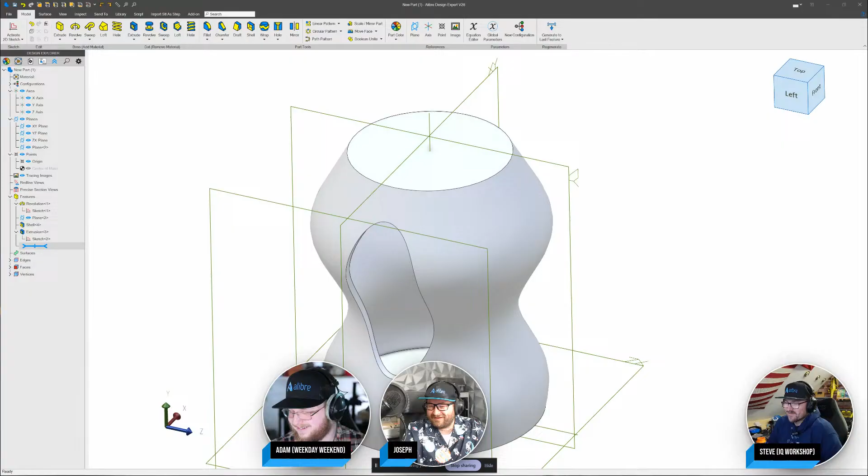So we had this question of, I've got this kind of curvy vase looking thing, and I'm doing a cut through it, and I expect the cut to be flat because if you were to hold this up to a belt sander or something, you get a big flat spot. How do we make something flat like that? Loved the question and thought about how I could make something like that actually be flat, so I'd like to work that out on air.

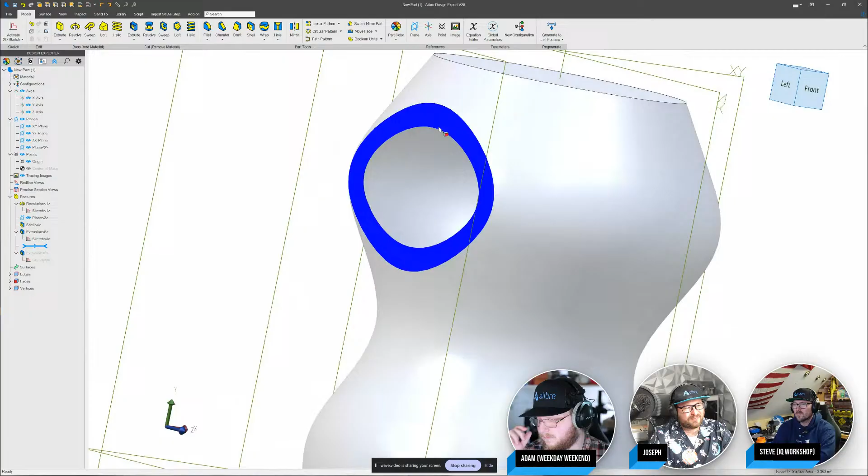First off, I think if we come at it from the side, that forces it to be flat, no matter how we go about it. And then we'll extrude through all. Now, the big problem, or elephant in the room, is now we have a flat surface right here, and we obviously don't want that flat surface, but we still want this to be flat over here. So how I might deal with that is create a sketch on that flat surface, and we'll see if Alibre likes this or not. I convert just this outer surface into our sketch, then run an extrude cut, and go towards the inside. There we have something that's flat, but also has walls that are more consistent with doing that cut inwards.

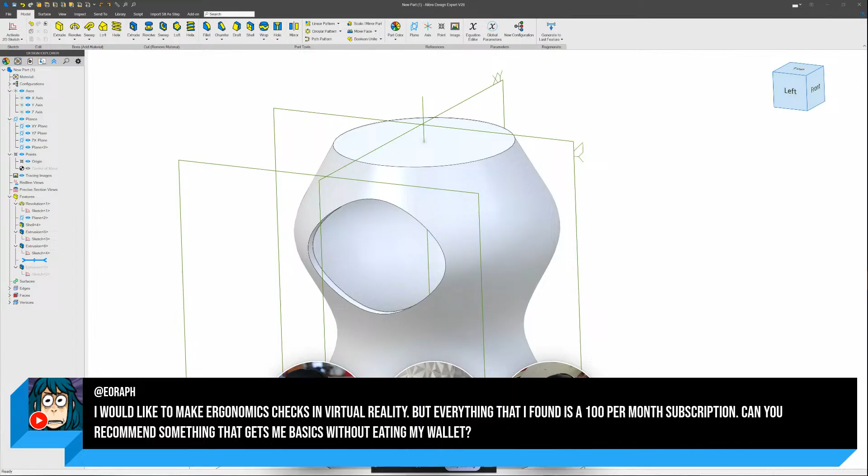That is a great question, and honestly I've never delved into virtual ergonomics checks before. I don't know if I'm that much of a help. I don't know if you guys have anything. I haven't touched VR since Oculus 2. I am so sorry. Does anyone else in the chat have any recommendations for something like that? If anyone does, you could always just straight up search for FOSS VR ergonomics checks.

So can somebody clarify what ergonomics checks are for the uneducated? Yeah, I read that as, if I have something that you hold on to, is it scaled and sized the way that a human hand would fit well with it? And if it's for a person, like maybe you're making a car, does a person fit well in there?

I do have one thing that I can do, so I'll pull this up here. Uh-oh, I have a totally broken assembly. Okay, maybe it's not as exciting, but you can see on the Alibre forum, if this wasn't broken. In fact, I'll overwrite the files. I bet this could... okay, give me one second while I work through this.

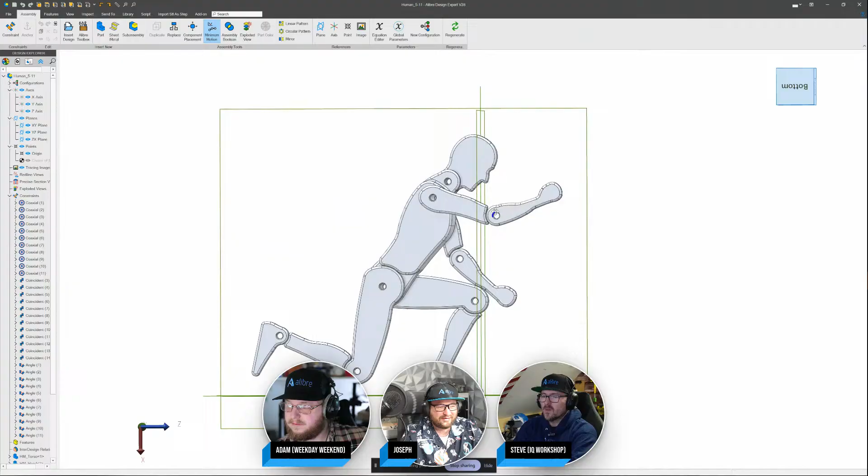But I have a model of a human being, and this could be really useful for someone. I think this is going to work this time. You can go to the Alibre forum and download this model of a human, but then you can stick this assembly of a human right where you're designing stuff and see how a 6 foot tall person would fit in there. That really is helpful with ergonomics. You can position it any way that you want and see if they can reach and fit and all that. So maybe that's a helpful suggestion.

Yeah, and I guess that depends upon the size of the model that you're working on, right? So if you're doing something large like a vehicle or desk and things like that, then something human scale would be quite useful. I immediately go to trying to figure out something which is a common size for something smaller, for example, a monetary bill. If you're doing something that is mouse-sized or something like that in scale, you could model something which is a monetary bill size, because that's pretty standard. And then you could place that next to the object, and use that as a reference point.

I like that, I like that a lot. Yeah, I mean, it doesn't have to be a monetary bill, right? It could be a cube of a set dimension that is in proportion to what it is you're trying to model.

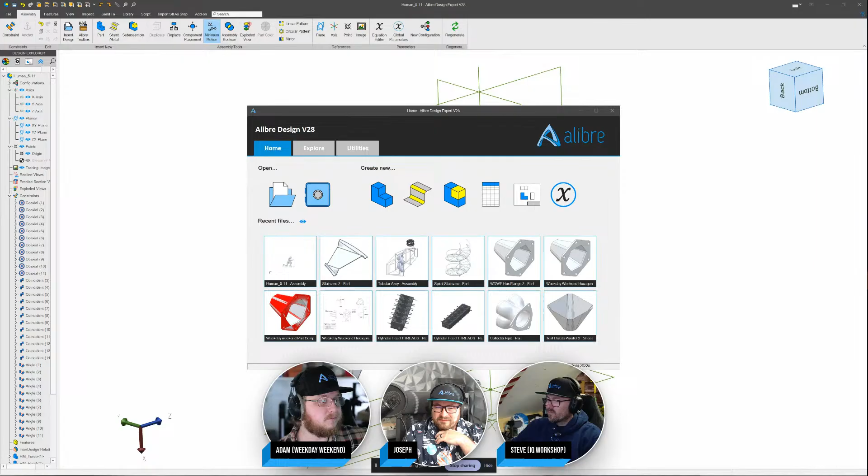Gotcha, that's something that I might like to look into, to have a little bit more insight on, because that probably is something that if one person is asking, we probably need to figure out a lot of ergonomic support recommendations. So that's an interesting one.

How to add special material to the library, for example PLA for 3D printing. So adding materials is actually pretty easy with Alibre, but specifically for PLA for 3D printing is a really interesting question because 3D printing itself has different densities, different infills and stuff like that. So hardness and elasticity you could modify, but for me the most important thing when I modify materials is the density of the material.

So what I would say is, what use would you have? What are you going to be using the special material for specifically for 3D printing? But then what you would do specifically in the material library is you do a new library and name it like 3D printing, then you create a new material and call it PLA, give it a density, and add all those values, then you can use it in your documents. But be careful, because if you really want this density value, the plastic itself might have that density, but the part won't, because you're using different infill values, etc.

Thanks, Adam, that's great, because I haven't added materials in a while. I was a bit rusty, and Adam swooped in and saved the day.

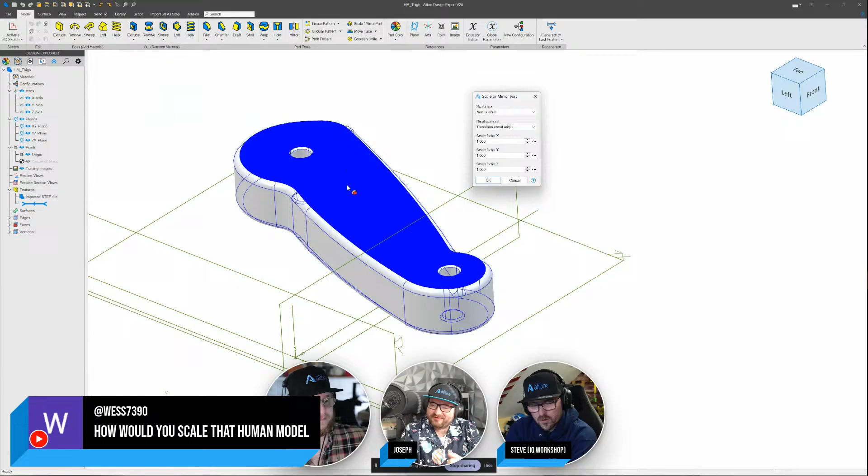Steve, I see the gears turning there. Yeah, so what I'm thinking is, could you set the pose of that model, that assembly, and then export it as a step file, and then bring that step file back in and scale it on the import? Could you do that? Oh man, I love that, yep, that's a perfect solution instead of going part by part.

Yep, let's go even better with Steve's idea. Even better, as Kostas would say, is if you make the entire thing parametric and make each part scaled on the previous part, so they all work together—when you scale one they all kind of scale together. But I'm not Kostas, I'm not that good.

How would that work if you needed multiples? So if you wanted to have mum, dad, and little Johnny in the model, right, you've got three different sizes. Would you be able to do that parametrically? I would think so, yeah, you could use the equation editor. Oh my gosh, what I'm getting at is, if you have the parametric element set up, would that be on a per model basis or per import basis? Because you'd have three of the same thing coming in, wouldn't you?

Well, you can, because you can do it a certain way, but I don't know exactly how to do it because this is a Kostas thing. Everybody go watch Kostas, Ex Machina Engineering on YouTube. He does some wonders with making different SKUs of the same part in slightly different sizes, using global parameters and equation editors. He'd definitely be the one to look at that, because I don't really do stuff on massive scales like that where I'd need a ton of different variations of parts.

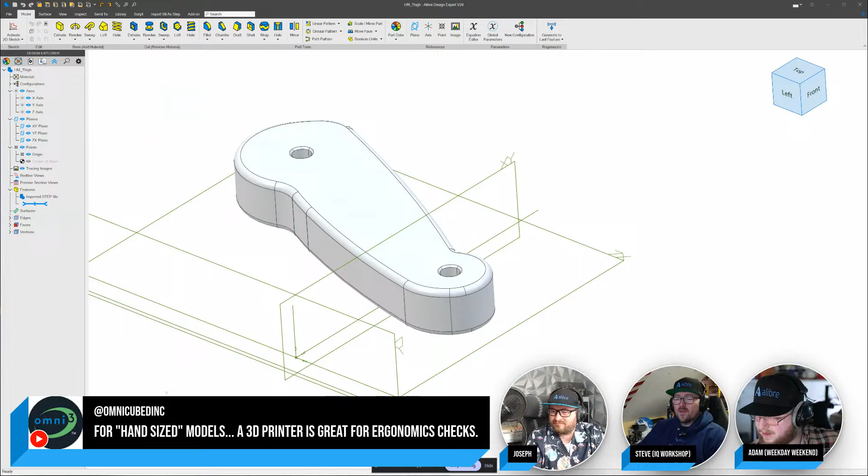I think we've just demonstrated there's more ways than one to skin a cat. That's true. Well, we're going to give Kostas some homework here, he's not getting out of this one.

Global variables could also be a possibility for scaling families of parts. So the sky might be the limit here. But yep, that's a good follow up.

Human scale is right. I'd like to experience it for myself to see where I would bash my head or lose balance to reach something. Thank you for trying to answer. Well, there was an attempt, but I'll look into maybe some other recommendations that I can make that might be better as well. So hopefully those assemblies and things help to incorporate the human factor.

Maybe one of the amazing guys on the forum will add a plugin to export it to like a common VR sculpting software or something like that. There's a challenge for you guys. Put Python to the limit.

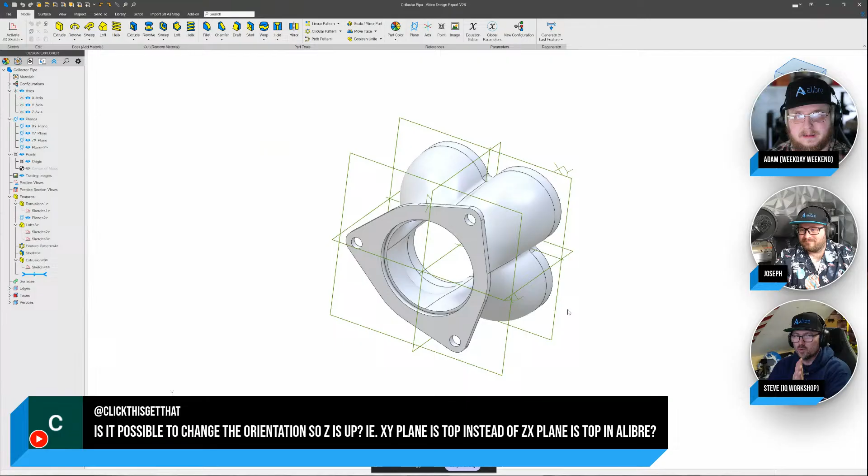This next question is highlighted. This is something that I've experienced on 3D printing. So you have a model orientated in Alibre, and then you export it for slicing, and you find that the orientation in your slicer is different to that of the CAD software. Now, I've worked around this problem by just choosing - I typically reorientate the model inside the slicer to get the best either result for strength or best result for detail, depending on what it is I'm trying to achieve. But that is something that I've wondered: is it possible to change the orientation?

Absolutely. So yes, absolutely. Sorry, go ahead, Joseph. Oh, Adam, you had a great one using, I think it was assemblies or booleans, and then I had another one that used surfacing. So I don't know if maybe I'll show surfacing and you can do yours. Sure, so absolutely. That's a great point.

Let me jump into my view tab here. And okay, so I got my triad right. So I got Y up right now. And there's not an internal way of changing this triad itself to reorient things. So we would be reorienting things by modifying the part. My personal favorite way, because I love everything all in one file, if I can manage, is I convert this to a surface. This is for Pro and Expert, right?

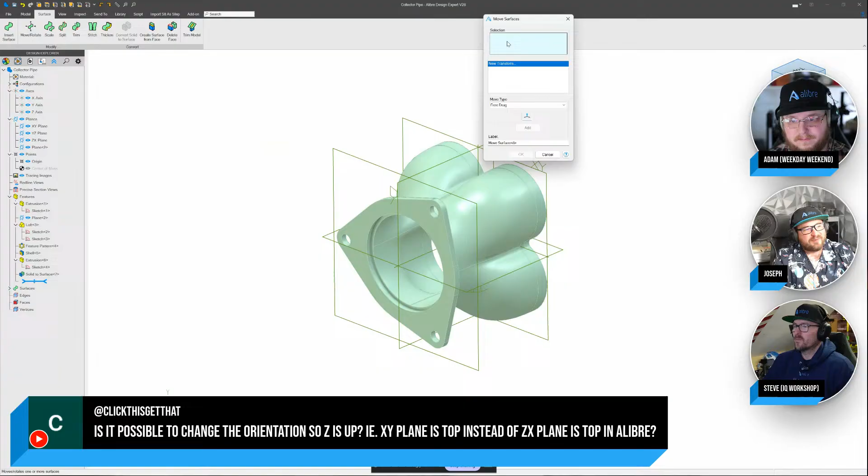There's ways to do it in Atom as well, which I think, Adam, you're going to cover. But in here, we're going to convert solid to a surface. And then I have this great move surface command. So I'll select my surface that I want to move. We'll do a precise move. And then I'll choose an axis that I want to move around. Let's say that I want to move it 90 degrees.

And I have not seen that before. Oh, wow. I think I chose the wrong axis, but you get the idea that we can start moving things around. Let me choose a different axis here. So we'll go back to a precise move, and maybe I'll choose that one. Wow, it's really moving. I haven't seen that behavior before. I haven't seen that behavior before either. But regardless, yeah, we can always move it again if we want to.

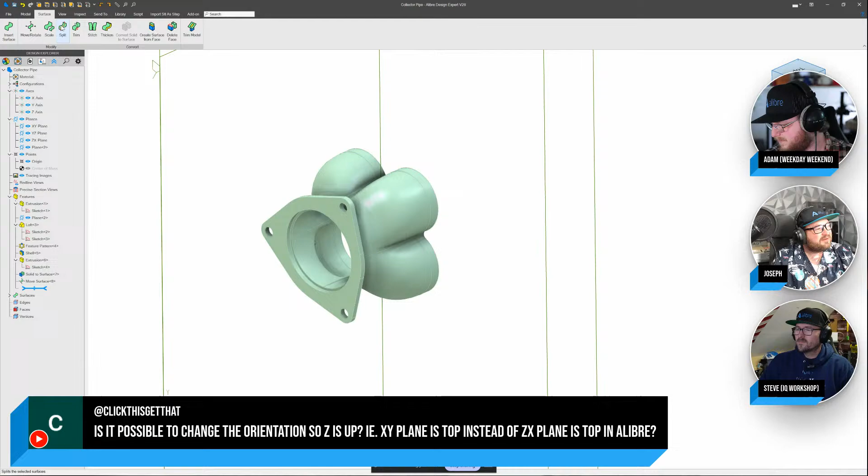But yeah, so I can choose like a precise move down this axis, 10 inches, whatever. So we can just move our surfaces around whatever we want to. I moved it further away that time. And then when I'm ready, when I've done all my orientations, moves, whatever, I can grab a split. So I'm just going to take one face and split it off. This is completely optional if you want to split a face or not. But now I've got all my surfaces here, and then I have one face all by itself.

And I find that when I go to stitch to solid, so I'll click on stitch to solid. If I'm stitching multiple surfaces, it works very reliably. And there we are, reorientated. So now our z-axis is up or down, depending on how you look at it. So that's one way to rotate it. Usually it works so flawlessly without causing another translation of the part. But here we are in this example because we're live.

Adam, I think you had one as well. I'll switch it over to you.

So, and I will also right quick cover this guy's really quick question. PikselPL98, hold control and click and drag. I'll just be warned, it breaks all the coincident constraints, but you do not have to delete the lines. So there's your quick tip.

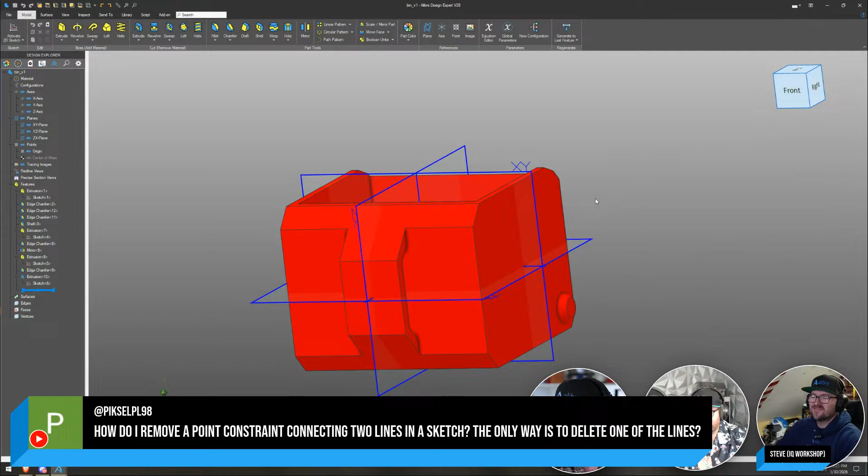So anyway, when I first designed this part, for whatever reason, I designed it on the wrong plane to start with. Now, if you do actually design in Alibre on the XY plane, you were designing right on the print bed. It seems a little weird because it says, the cube over here says front and top this way. But if you think of it as the front is your top instead, you are actually modeling right on the print bed. But of course, if I import this into my slicer, then it's going to be in the wrong orientation.

So if I instead open up a new document and I can do a Boolean unite, so I'm doing this in Boolean. You probably could do the same thing in assembly the same way, but Boolean to me is just the easiest way to do it.

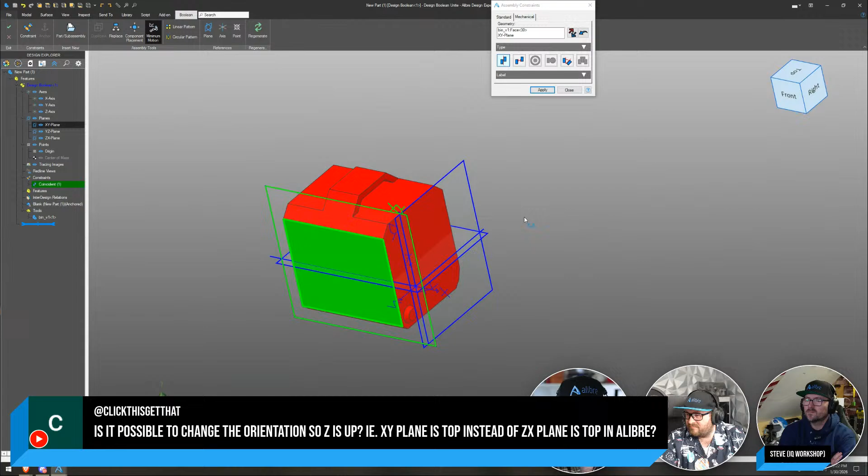Add your one copy of the model, and then you can just constrain it with everything being on the right plane. And then, of course, from there, we can show reference geometry, and then I can lock it down a little bit more if I wanted to.

But from there, now I can export this, and now I have Z upward. And if I put this into the slicer, then it will be oriented correctly. So there we go. Thanks, Adam.

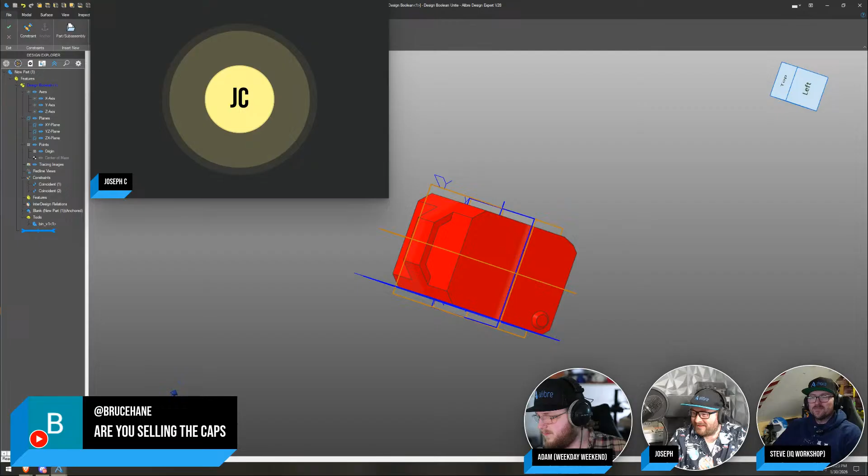It looks like we have Joseph C. who's joined us. Joseph, let's get you on the stream. How are you doing today? Hey guys, great, thank you. I watched one of your streams before and just listening in this time.

About the VR question - I don't know if this will answer it, but there's a way to export out from Alibre, probably through a STEP file, and then convert it to FBX. I may have had to use another tool like TurboCAD or something like that, and get your CAD model into Tilt Brush, which used to be a Google thing, but I think there's now an open source version. So you can bring in the model, and then you can walk around in the VR environment, and you can get like squat underneath and look from below, or like in his case, see if your head's gonna clear something or something like that.

The only problem is that program doesn't maintain scales in any kind of absolute way. So you have to kind of import the object in and dimension it by virtually resizing. But other than that, it's great for doing VR interaction with your model. You can't move the models around like different sub-assemblies and all that because it doesn't have constraints. But as far as being able to take an actual object and interact with it, it's actually pretty good, and it's free.

Wow, I'm so glad that you had that. Nice. I mean, go ahead. Nope, go ahead. Yeah, I think the audience had a better answer than we did. So thank you so much, Joseph. I'm so glad that you came on. So it's free and open source. I don't know if you have any links or anything that you could post in the chat, but that is...

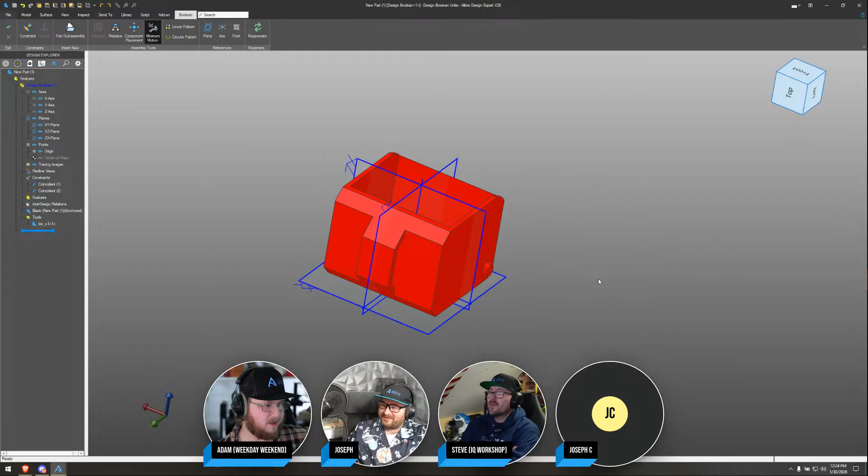Yeah, I'll look for it real fast and then drop it in. We appreciate you, man. Hopefully that solves the problem there. The power of community - exactly. I knew someone in the chat would have the answer. There we go, we are glad for every viewer here. This is amazing, thank you so much, Joseph. And by the way, you have the best name in the world. Excellent, not biased. Objectively.

Sweet, hey, thanks again, Joseph. Okay, we'll move on to another question here. I thought I saw one. I think we might be a little bit question dry. Post your question again in the chat if we haven't gotten to it. Well, maybe it's that time.

I made a promise that we would be moving into our V29 preview with Weldments. Ooh! I'll get that set up on my screen and chase down a few models here. Nice.

So before we get into that, can somebody give a 50,000-foot view explanation of what a weldment is to start with? Because I don't know what it is. So I guess I can't be the only person that doesn't know what a weldment is. And why do I care? It has to do with welding, of course.

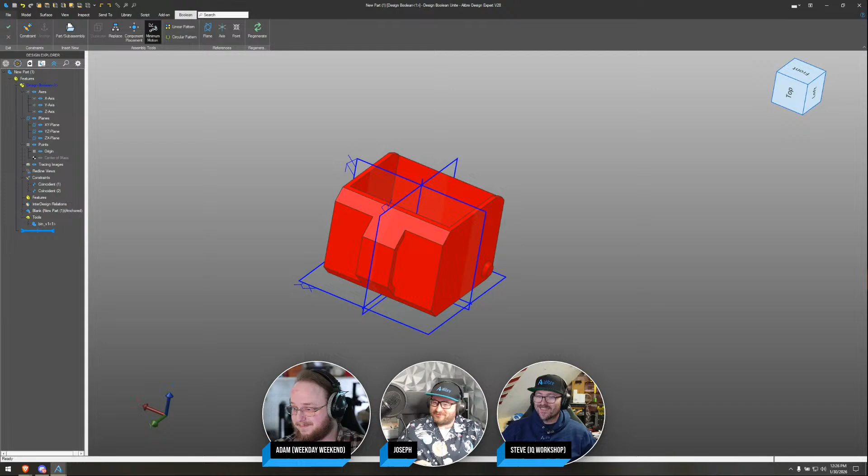So yes, I'll pull up a model here and share my screen. It's coming up here. So this is an example of a weldment that I created as a little test, work in progress. And I'm going to share my screen right when it loads up here. That's to load.

Anyone heard any good jokes lately? All right, here's one. Knock, knock. Who's there? OJ. OJ who? Okay, you can be on the jury.

Okay, that was an old one from an 80s show that I watched.

So this is an example of a weldment, very rudimentary. I'm going to have to add in the...

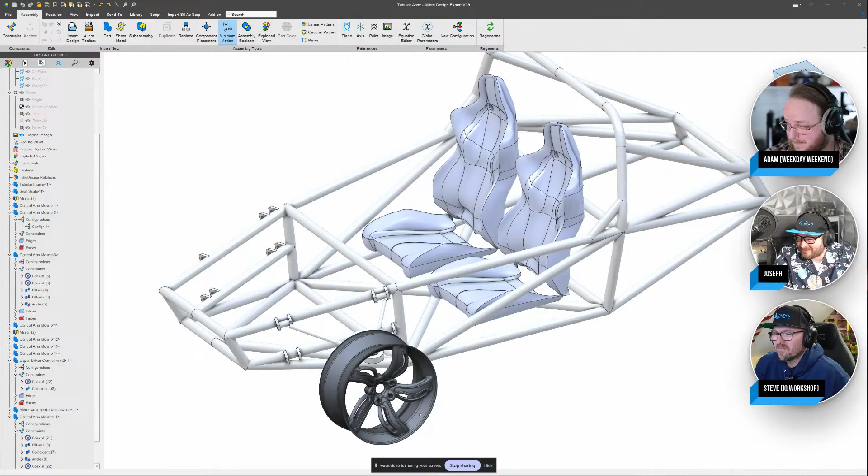This is an example of a weldment. I've got in progress, in a very early development, an atom-like car made up of tubes that are welded together. When we want to make structures, you can imagine planes that face the right angle, extruding them, getting things to fit together, trimming the edges nicely so you can cut the pipes in advance and fit them all together. This module is going to make making these kinds of frames and the trickiness of angles and coping things very, very easy. Let's jump in and see how this frame was made, again, in Weldments.

So jump into a simple window here. Does this make sense as to what we're getting at, Steve? Yeah, it does, and if it's what I think it is, this is going to be pretty cool. Yeah, that's what we're going for. The chat can tell us if we did it or not.

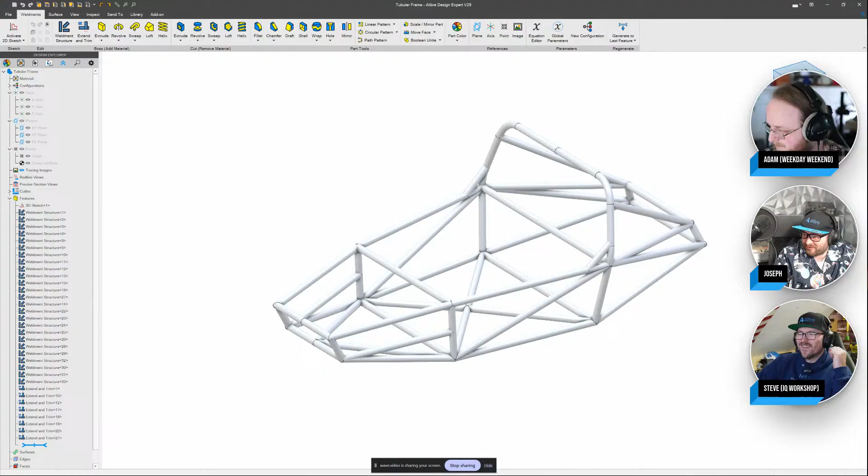So this is made actually from a single 3D sketch. Let me break this down so we know what we're all talking about here. I'm going to create... oh, I went into the new part out of habit. Let's jump into a new weldment part. And you know, this module is still under development, so we don't have that yet.

So from the home screen, I've gone into the weldment interface. Now this looks deceptively like the part interface with two extra tools put in, but the final weldment interface is not going to have nearly the amount of tools that we have in here. It is not made to work with the parts, so those part tools that we have are just artifacts.

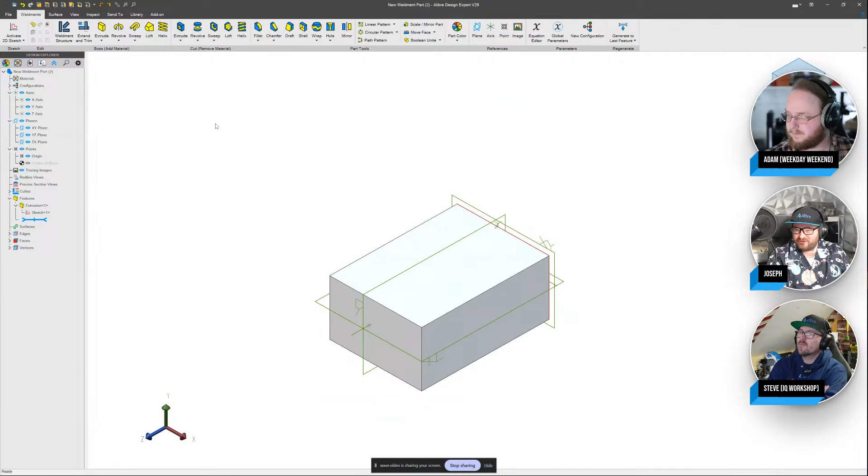If I use an extrude here, I can create an extrude, but notice no faces or edges are selectable, right? Because this whole module is not meant to work with parts. So extrude's going to be gone, and a bunch of other things are going to be gone in the final version. We just have it here because, of course, this is still in progress and all the details are not complete.

But I will keep this 2D sketch. I'm going to make another sketch—in fact, I'll make a 3D sketch. And if I start making a sketch in 3-dimensional space, I can say I want the end of this to be on my 2D sketch, just like that. And then I can say I want this line to just make sure that it's parallel with this axis. So I've got some multiple sketches working together, 2D and 3D.

Let me give this a distance here of something like 10. And I might want to jump into my 2D sketch just to make sure that it is large enough for my weldment profiles. Okay, well, let's build a weldment here.

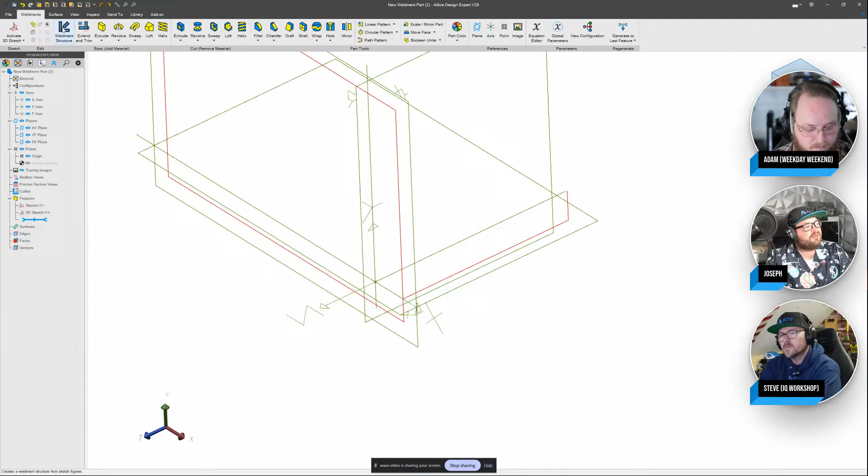So first thing I'll do is go to my weldment structure, and I can select a profile. Now this is probably going to change in the final version, but as in our temporary development version, I'm just picking a file. I'm going to choose pipe for now. And then as I start clicking on things, we can see that we are building a weldment.

Now you'll notice that I cannot click on this other sketch that I've made, but that's okay. So as of right now, I have a number of ways I can just generate the pipes, and they're sweeping along those paths, but we also have some corner treatments that we can choose.

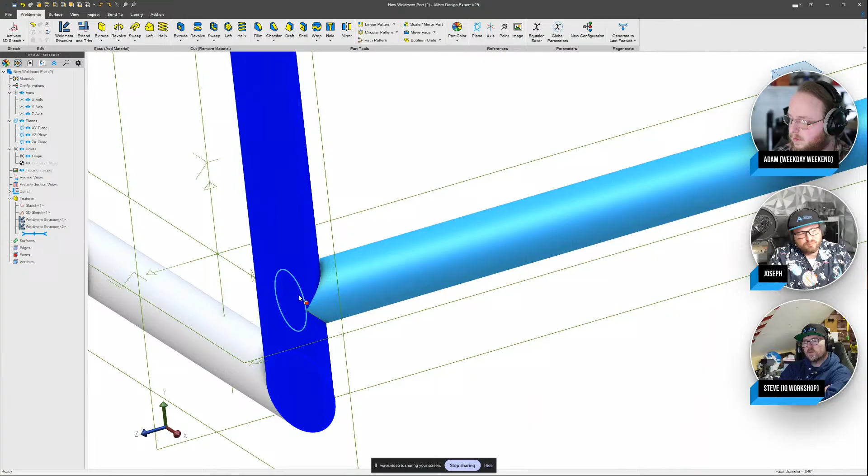And then I can make another weldment structure here. And we can say, you know, that's all great, but if I have them in separate weldments, then we have this pipe inside of this other body. And we, of course, would want to take a hole saw or some other tool and cut that pipe so it has a fish mouth shape at the end of it, and then it will fit flush against that.

Well, we have some tools that I can show in the future that are going to be able to trim these bodies relative to each other and get that trimmed properly. So that should be a really exciting development. But as of right now, we were able to make a weldment very, very easily.

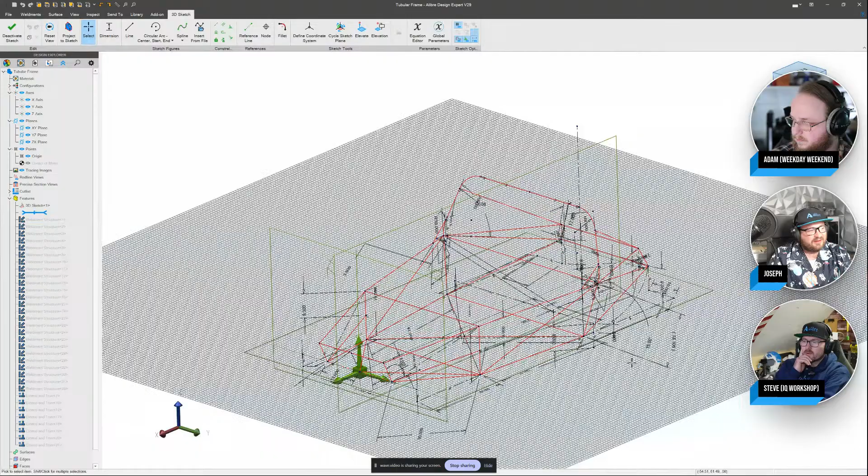And if we take a look at the more complex example that I have, off of this 3D sketch frame, you can use as many sketches as you like and get them all to work together. We also, in this case, have an example where I made this off of one single 3D sketch. So the 3D sketch module is complex and robust enough that you can make a frame like this off one single sketch or many. And as I run through the tree, you can see that we just make one weldment at a time.

And these parts of the frame.

Now, Steve, if you've never worked with weldments before, how's this looking to you so far? That's looking pretty cool. I understand what we're trying to achieve here, and I can see the tools that we're using to reach the goal of that frame.

I guess from my angle coming in as a maker, I may not have access to industrial type tools that would cut those fish mouths and things like that. So what sort of output options have I got to get the ends of the pipes? For example, could I create a template that I could print on paper to wrap around the pipe and cut it by hand with a disc cutter or a hacksaw or some other tool? Yeah, I like that.

Because I immediately think of like a motorbike frame, because that's a project I've been thinking of doing at some point. Yeah. But yeah, I'm looking at that and thinking, that's pretty cool. How can I use this? How can I get the output?

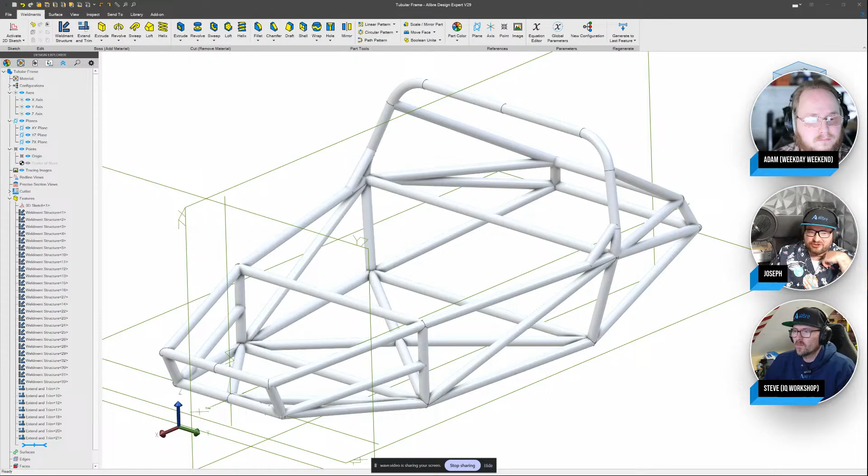Our weldment module is going to generate a cut list, so every individual pipe run here is going to be included in a cut list that will tell you the length of every pipe that you need to get. You can even figure out the cost per inch, and have it calculate the costs for you as well. Hopefully that helps you edge toward a solution.

I'm having a squirrel moment, right? I've got about 7 projects in my head that just popped up just because of what you just showed me.

Good question. Can you make a pipe with a curve or multiple curves? Yeah, they are being made off of sketches. If I go into my 3D sketch here, hopefully this is an example of different arcs that you can use. I don't believe splines or non-constant radius curves are supported, and they're hard to make in real life anyway.

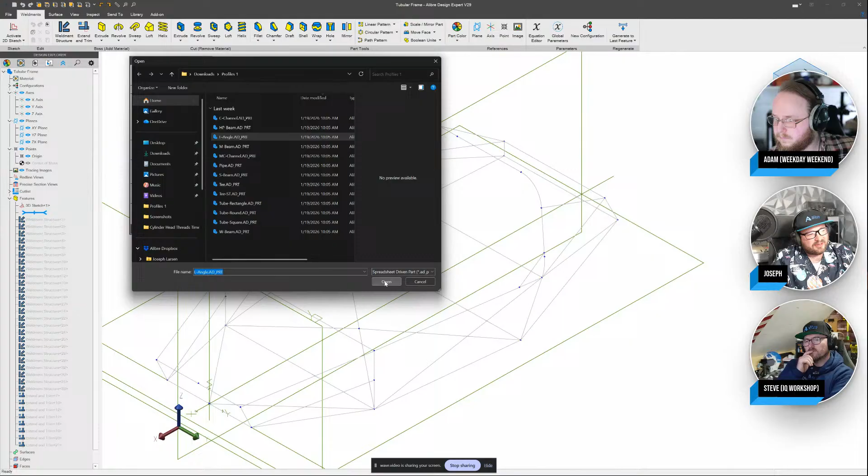But when you have constant radius curves, then we can absolutely make a curve off of that. And what that might look like if I roll my tree back is, once again, I have these curves in 3D space. I simply click on my weldment structure, and it doesn't have to be pipe, we have all kinds of things. I'll go with maybe an L angle. And here we can have bent angle, I call it angle iron, that goes all the way around. So hopefully that's an example of curve. Let me know in the comments if that answers your question about being able to use curves with weldments.

But yeah, this should spit out exactly the profile that we need. That's awesome. That is awesome. Looks like that last little bit might have also kind of answered, yeah, that one, Mark P. 4540. That last bit you just did might have kind of answered his question too a little bit.

Yes. So when you do structural steel buildings, it's possible to do the global 3D sketch and then assign columns as square tubes, use I-beams in all various sizes. Excellent question. Let's jump into the weldment structure.

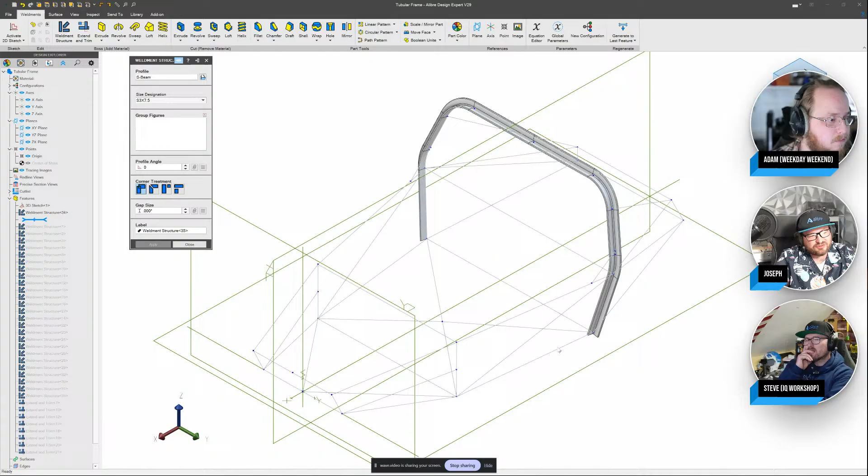Here I have a bunch of bent angle iron. May not be practical, but it looks really cool if you ask me. I'll jump in here and let's go with kind of an S-beam, I think that's pretty structural. And then I can choose a new group and get those to interact.

And we can even trim the edges off of these to get a real watertight fit. And then, of course, I can update this size to a larger or smaller profile. There we go, and get these to interact just like that. So for the structural steel question, let me know if that answers your question in the comments. That is a really good question there.

The thing that strikes me the most as a newbie looking at this is the speed at which you are getting a finished product. The fact that you can get those joints - in other CAD applications, what you'd have to do to get that in a finished state, the time it would take you - that looks like it's going to shave off a huge amount of time on a project.

Oh, perfect. Yes, yes. Because you don't have to figure out all these weird plane angles or do strange sweeps. It just kind of figures it all out for you. I love that. That's cool. I can't wait for that to be available.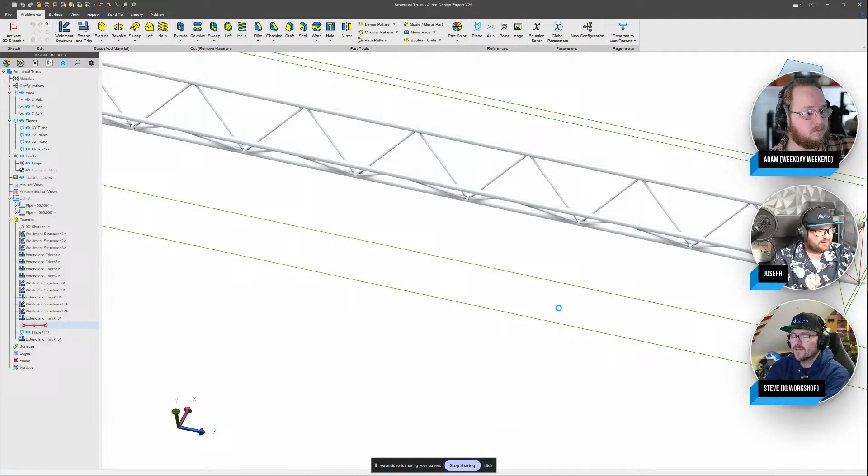Yeah, great question. Let me pull up another example that I think explains it pretty well. So here I've got a structural truss that is loading up - I always think about going to live concerts, because they have those things with the lights hanging on them. What I did here is I said, okay, I've got this really, really long pipe. I set this to be 1,000 inches long, and then I go to shorten that.

Once this is shortened, it's a different dimension, of course. If I were to load this into a drawing today, the length would probably say 1,000 inches, and that's not reflective of what the actual length of this is. I think that's getting into what you're saying - when we trim things or change things, what is the length going to be? Fortunately, that's going to be updated, because 1,000 inches is not realistic. So we are likely going to be going down the, I guess you'd call it, the envelope box approach. If I were to make an invisible envelope around this pipe, it would be the final longest length that you have as a solid.

So when you have that little fish mouth pipe, it's going to stop at the end of the fish mouth and not go further, not go shorter. Yeah, it'd be the part's envelope. That's cool.

Let's see, now you can break the pieces apart and trim and put bolt holes, as to draw individual parts? Yes - now the version that we're looking at, I can't put holes in it, but holes are part of the scope before release. So holes are going to be implemented. We'll have the hole tool and all of that.

Good question. This is looking like - so if threads were like the golden child for makers in 3D printing, this weldments is looking like the golden child for manufacturing and large scale work. Absolutely, basically this is looking like a huge time saver.

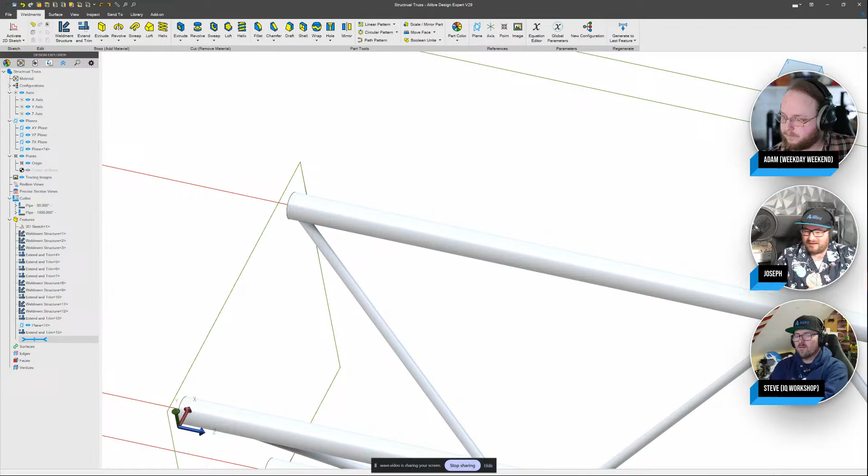As far as drawing individual parts from that previous question, I'm not clear on that one. That sounds like something I really want, so I'll ask internally and see what that looks like. I can tell you this is a different approach than our part environment, right? Each of these is its own body, and they are butted up against each other, but they're not merged as a single body - they still have their own individual bodies. So a lot of development work was put in up front to get the true multi-body path in Alibre, and we may see some interesting future developments based on that.

So we say this is coming out in V29 - which versions of Alibre will this be available in? V29 through Atom, through Expert, right? Which versions does this show up in?

Excellent question. V29 is planned for our dot release. So we're going to release V29, and that's going to include all new user interface. Then in the dot release, V29 dot whatever, that's when we're going to see Weldments. As far as I know, this is going to be an Expert release module.

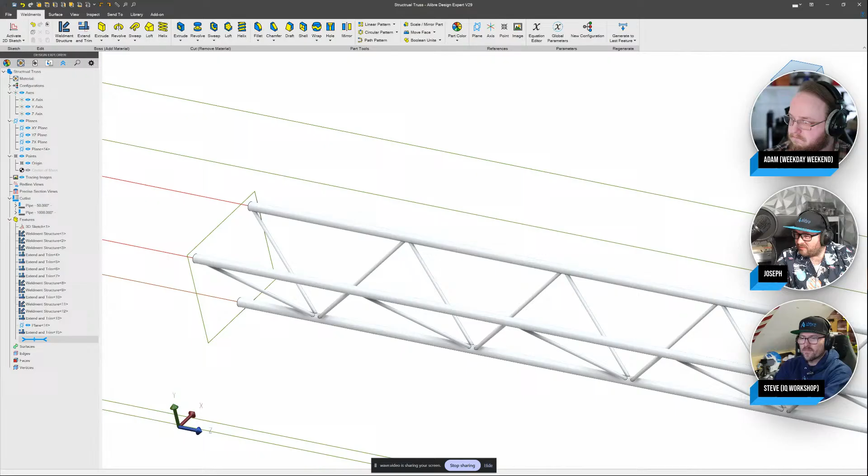What other questions do we have here? How do we get Alibre to make their documentation more robust? There are a lot of tools and features that are only mentioned with no elaboration on how to use them.

Great question. If you're looking at the documentation on help.alibre.com, I usually think there's a lot of answers on there. If you see a gap, please let me know, joseph@alibre.com. Send me a message and I want to look into that further if you see gaps.

We also have some YouTube content where we have a lot of demonstrated workflows and things like that, and that covers things. I'm kind of a 'watch someone do it' more than 'read about it' kind of person, so I think YouTube is pretty helpful as well.

I was just going to say there's also the user forum. They're really, really active and really, really good. So if you don't find what you need in an official video or one of our videos, among those of us who make content, then definitely check out the forum as well.

I'm glad you mentioned that, because I was going to ask about community generated features such as scripts and those sorts of things. I guess the documentation around that feature or script that a community contributor has put together, you're relying on the community contributor to write the documentation for it. Yeah, that's the only caveat that I would call out.

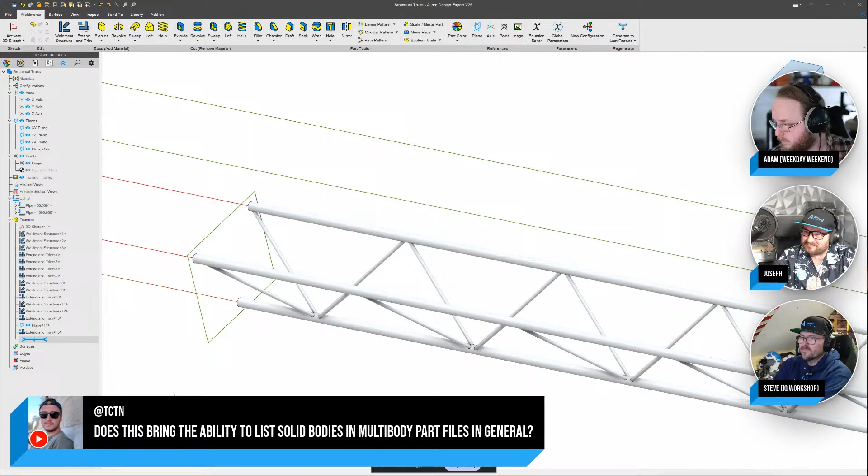When dimensioning, can you not just select another dimension rather than search through a lot of FX to find it? I don't know if I'm fully following that one. When dimensioning, can you not just select another dimension rather than search through a lot of FX to find it?

Is that like the equation editor someone's asking about? Is that someone in a sketch where they've got a defined dimension in the part itself, and they want to associate it all at the same time? So when you change one dimension, you change multiple elements that have that one dimension associated. So if you say the width of an object and you apply that in a couple of different places in your sketches, I think that's what it's asking.

How do you reference it without having to scroll? Can you select an already defined dimension in the sketch that you can visibly see? Yes. So the easiest way to do that is, once you make that dimension that you're wanting, to rename it.

I know it kind of sounds odd, but whatever this D1 dimension is, if I just name that, I don't know what to name it, but main width or whatever. Now whenever I make a sketch, if I type main width, or maybe I should shorten it like MW, whenever I just type main width in that dimension, it'll actually just make it that. You can just type main width here, if I've done it right, of course.

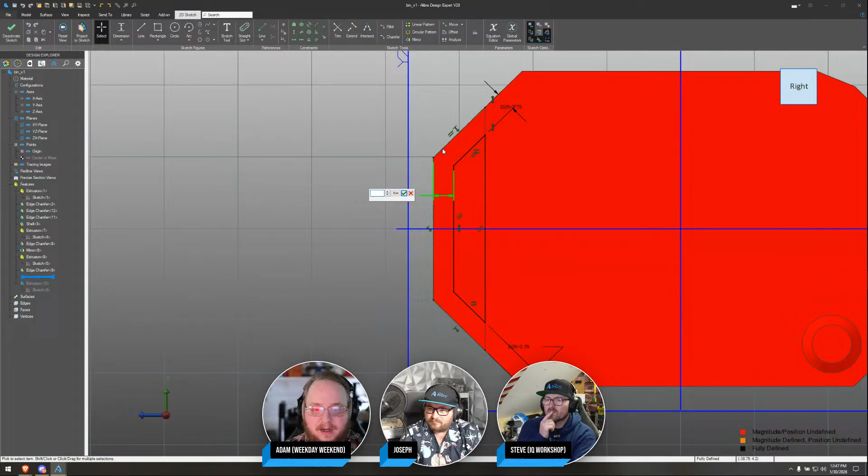But it will accept that. So if I just rename this MW, then if I go here, this D1 has now become MW, and I can just type MW whenever I dimension things, and it will use it. So to me, that's the easiest way to do it, if you know you're going to be looking for a dimension, to rename it like that.

I think that comes from setting up your design well early on, knowing that you're going to be using referenced dimensions. For example, if I'm designing a drawer, I know I need a width, a height, I might need a material thickness. So before I even start, I might actually start creating those variables in the system already and place the values in. As Adam was saying, you can just type in the variable name and select it from the list. That's a way you can set yourself up to win from the very beginning.

It's a little bit harder if you're like 30 days into a project and you've got about 50,000 items in your list.

Yeah, I switched back to V29 here. I'll take the screen if you don't mind, Adam.

Another thing is, as we add different equations and variables, you also have the option of giving a name to something. And as you have tons of things in here, you can check something as your favorite and then sort by favorites, and it brings anything with a check mark up to the top to easily find it in that interface, in addition to being able to use the naming convention that you showed, Adam, which I think is the best solution.

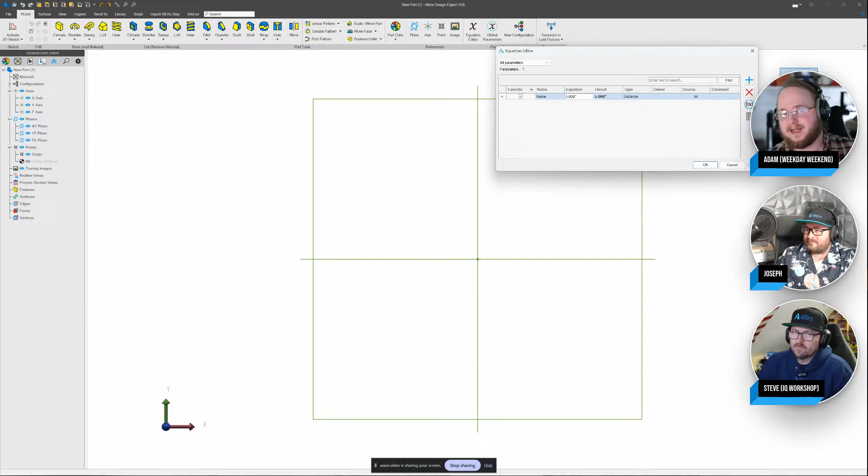That is a big one, because are we asking, like, are 90% of people wanting to visually import an STL file and model around those dimensions, or are 90% of people wanting to modify STL files actively, right? Those are big different cases, big different things that we would develop for. Ideally we'd have it all, but if we can serve 90% of the people with something that's really easily done, then it's a lot different than if 90% of the people want something really complex.

Is there a way we can poll? We could probably set up a poll on the user forum. Yeah, that's probably a great place to do it.

I have to ask right quick: is importing STEP files that for specific versions of Alibre? Because we should be able to import STEP files into Atom. Let me make sure. I'm pretty confident you can. Yep. Okay, this gentleman's having an issue.

If you're having issues, I would recommend double checking that if in Windows you're associating STEP files with Alibre, or if you're just trying to double click them, you can right click and open with, do it that way. Or try to see if it's a corrupt file, or if you're really having problems with all STEP files, maybe back up your user files and reinstall Alibre just in case. You never know with some Windows updates nowadays.

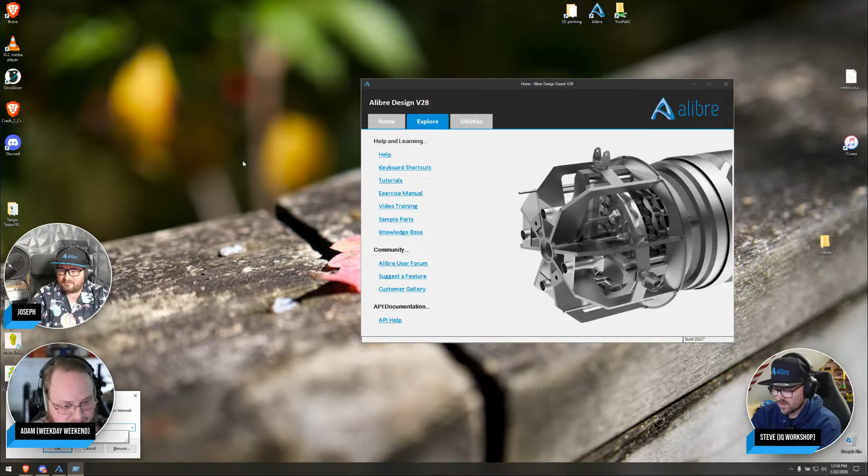Alibre does have shortcuts for these, though I almost never use them and don't always remember. I think it's on the utilities tab, which I'm not about to show on camera. But if you press Windows R and type %appdata%, it'll bring up your roaming folder, which has all your settings for your different programs. You can go into Alibre Design, then your version, then default user. You can see I have profiles since version 26. You can copy these and back them up. This is your keyboard shortcuts, your color schemes, your default units, and all that kind of stuff.

If you copy those and paste them into the same folder on the next computer, it will fix everything when you relaunch Alibre. So close and reopen Alibre after pasting these, and it should update most everything. I believe there is a shortcut to this folder available, possibly in the utilities tab, but I'm not about to show my machine information on stream.

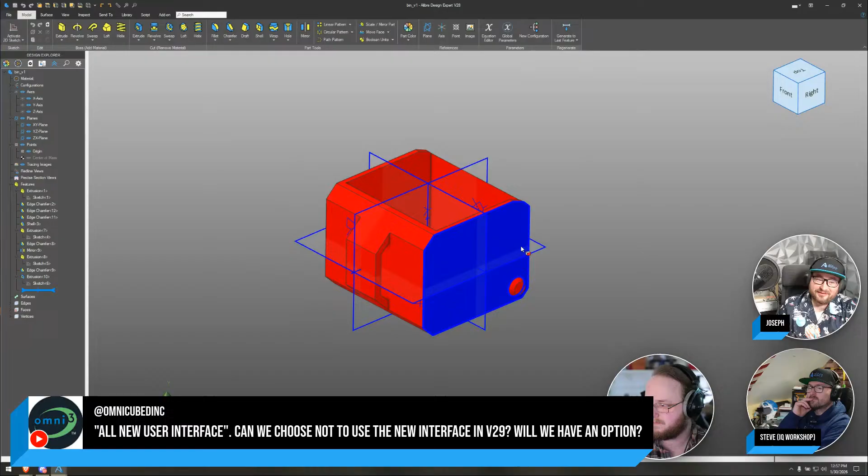If you like the existing interface now, I totally understand. This new interface is a lot less invasive, and there's a lot of objectively better things. Instead of having things that force you to click, things can show up in the corner, and you have more docking window control, and it remembers your previous settings, so you're not always saying associate to, remember association, when you import sketches.

So there is a big improvement, but no, the short answer is no, we will not have an option to go back to the old interface. But the reasoning behind that is really good, other than just trying to make the UI better. A lot of it's the same. I was just talking to Joseph about this before the stream. I'm a little worried about it too because I'm so used to it and like it how it currently is. But remember, guys, they're changing this UI to get off some current dependencies.

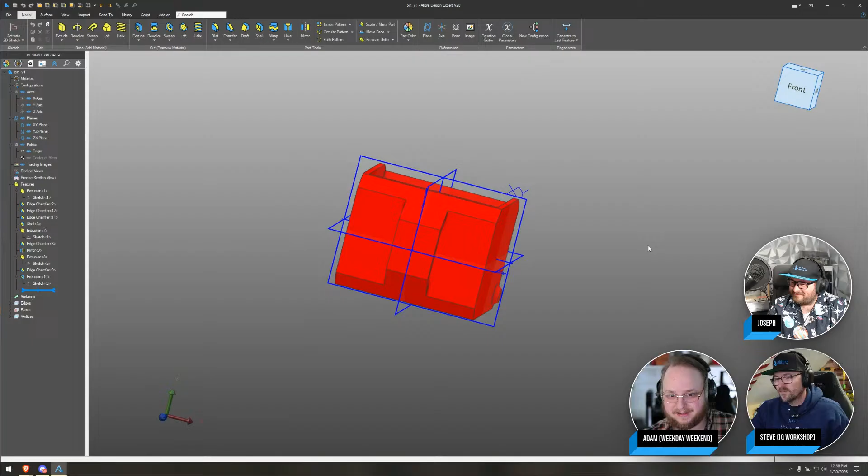And the possibilities that are opened by making this switch are really good ones. No guarantees have been made yet, but to me, Alibre on Linux or Mac is worth it, and that's the door that gets opened with this change. So yeah, it's a possibility. In about 6 months' time, there's going to be an analysis to see if we can do it, and I'm hoping so, I know there's a lot of interest in it.

I see a comment I can't put on the stream: 10 years of dealing with Fusion and recently discovering Alibre, cannot wait to jump ship and take others with me. All I can say is welcome, we can't wait to have you.

Check out the forum, check out Ex Machina as well, we've been shouting him out this whole time. He's normally with us, but he has a lot of really good videos on switching from Fusion to Alibre. So check him out because he's really good. And to be fair, I'm not a pro user myself.

So CAD is not my day job. I was a heavy Fusion 360 user, and I've migrated across to Alibre. I would say between 80 to 90% of the features and functionality have been very intuitive, and I've been able to pick it up without having to go hunting. It's more the niche use case stuff that I've had to go hunting for. So from ground level, you're probably going to get up and running reasonably quickly just because of how intuitive Alibre is.

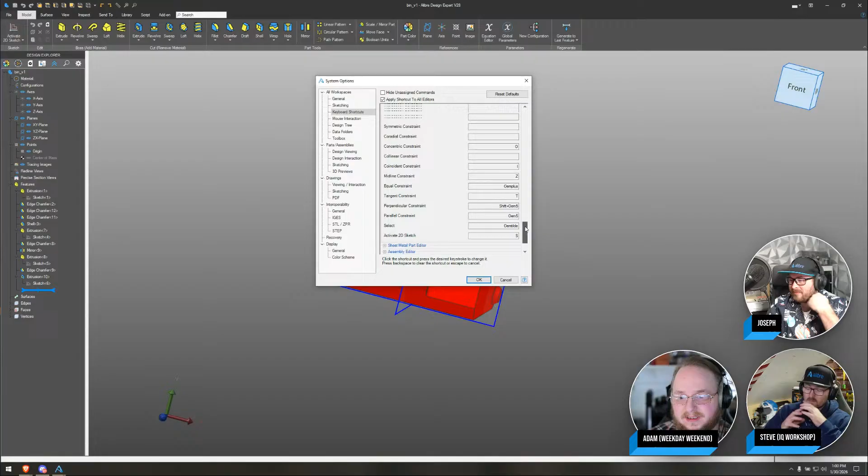Yeah, it was easy for me to switch over as well. I was previously on Onshape, and Alibre's ability to go in really easily and just modify keyboard shortcuts is super easy. It's so easy that in fact I don't even use the ones I was using in Onshape before because I've found better ones that I like better. You can really configure Alibre to work closely to your muscle memory, which is really nice. And once you find better ways your muscles would rather move, you can fix that up too, depending on the keyboard shortcuts. It's really nice.

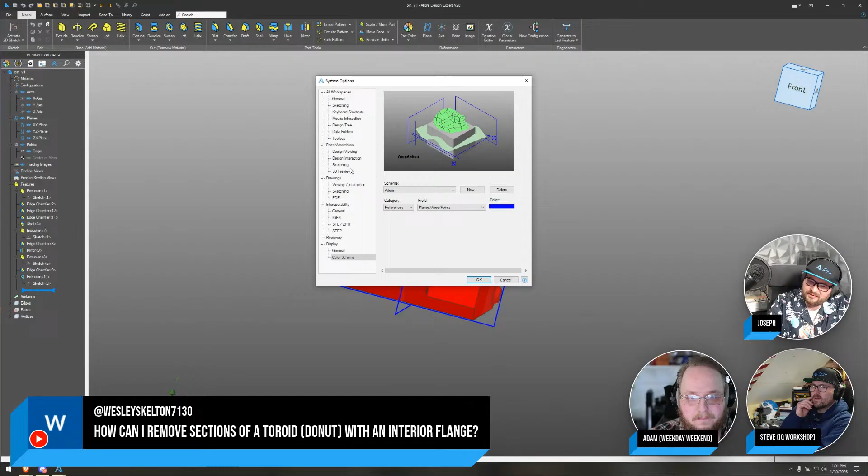Looks like this one might be one for you there, Joseph. Yes, I'm kind of hung up on what the interior flange is. Is that like we have bolt holes on the inside, or just maybe flared on the inside? Let's see. If anyone has a link to a picture or something, I don't know if I follow it, and I really want to answer that one because it sounds super interesting.

No one mentioned pizza with extra cheese. Oh man, I mean, we did have the controversy of hard or soft shell tacos last time. We're mentioning pizza, pineapple or no pineapple. That's the next controversy. I'm gonna go no pineapple, but if someone gives me a pineapple pizza, I'm still gonna eat it. I like that we live in a world that pineapple on pizza is available, but it's not suiting to my tastes. It's not for me either. But let us know in the chat what you think, pineapple or no pineapple.

And then I guess it looks like the donut has a whole disc to connect. I'm going to model something up here and just make sure that I've got the right concept of this question. Yeah, so that is the difficult part, right? Taking words on a screen and turning it into a 3D model is crazy.

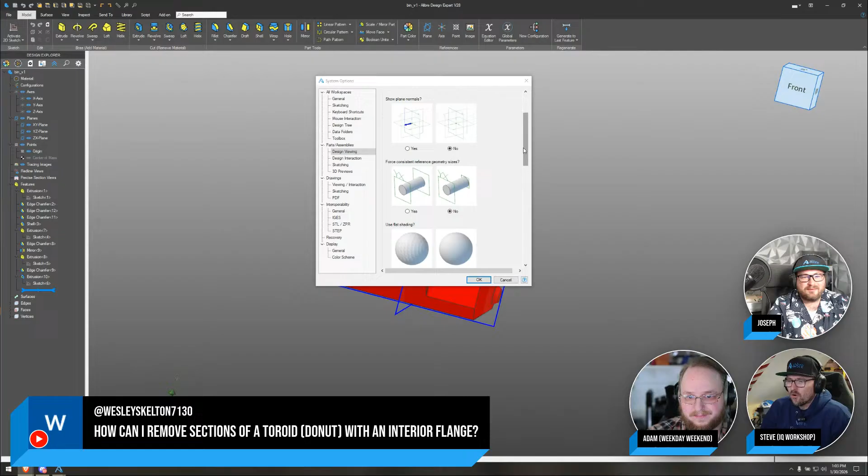So here's a question for you, Joseph. Is there an area on the forum where people can post a more detailed version of their question with possibly adding pictures that they could reference during the stream, so we can go and do a deep dive on the question itself? That's awesome. Yeah, in our forum, I'll change it to my screen, we have our topics, right? So alibre.com/forum, go to using Alibre Design, and then maybe post a link to a question and see if we can access it from there. That just helps give us the context of what somebody's asking, because it can be very challenging on a live stream to keep the context as the chat scrolls, especially if someone asks a follow-up question.

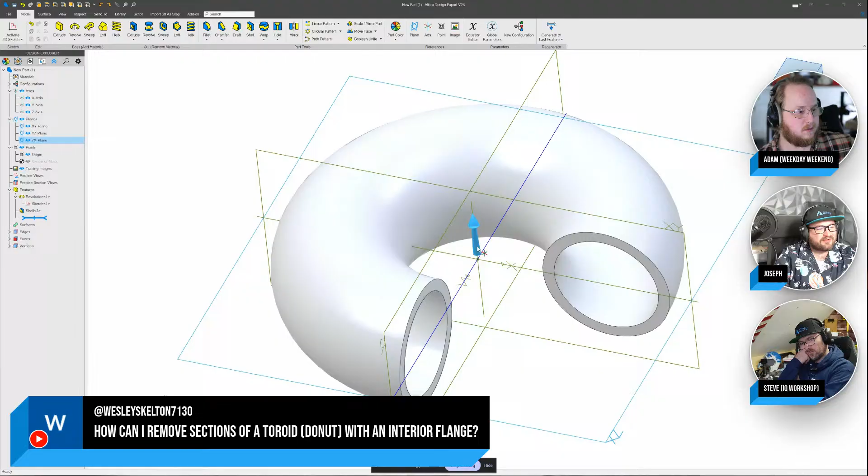But it could help us out answering the questions with more detail. I totally agree. Just working this out here. Creating 4 independent sections of a donut that connect with the center. That's an interesting one because as of right now, we don't have the true multi-body modeling workflow. So creating 4 independent sections from the center, I'll show my screen again. So we're saying maybe a little cut right there, a fourth of a donut connected to another fourth that's connected to another fourth.

That implies that we want to have 2 bodies that are touching but still separate bodies. As of right now, that's not supported in Alibre, but I would suggest going the assembly route and make those sections in an assembly so that you can have those bodies butted up against each other currently. That is one of the things that the Weldment workspace has opened up as a possibility for more supported multi-body modeling workflows in the part environment in future versions. So stay tuned, that could be something we talk about. Hopefully I've understood the question correctly and provided a reasonable answer there.

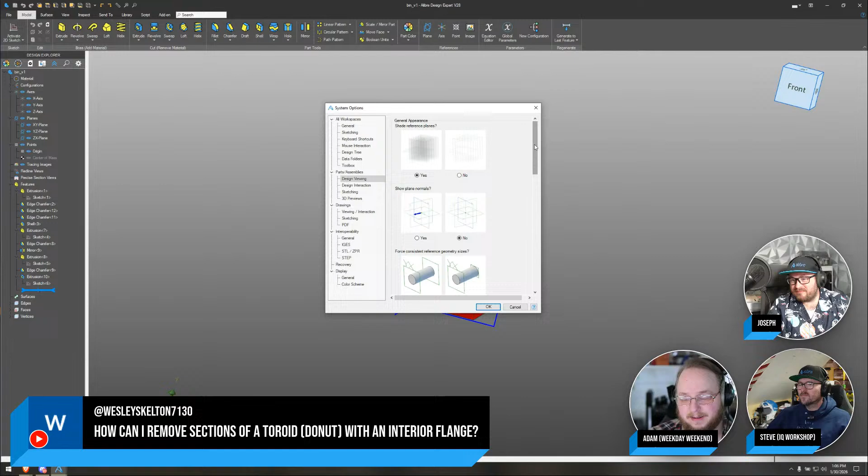I'd hate to put more on the plate of the devs, but while they're looking at the UI, it might be cool to add a slider here on this general appearance, the shaded reference planes. Might be cool to have a slider or different levels rather than just yes or no. That might help them out.

As far as color scheme, there are tons of different things you can do for categories, references, your sketches, and all that kind of thing. I'm not quite sure how much of this is going to look the same in V29, but this is kind of where you do all of that, changing colors and such. It's really just something you have to play with to get it how you want it. But once you do get it how you want it, you can save it and then do that method we showed earlier to get it across all your devices and back it up so that you don't ever lose it.

Important update: pineapple and Hawaiian barbecue sauce is good enough to allow it on pizza by orderer's choice. I like that we live in a world where that can happen.

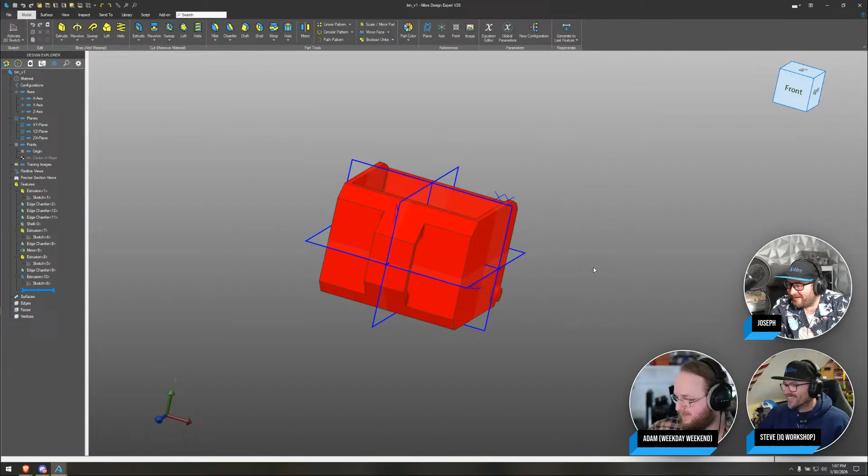You all are doing a great job teaching us how to use this wonderful program. I always want to put the nice comments on, right? Thank you so much, Wesley.

We do our best, we're trying to take everybody. If we've missed your question, some of these take a little bit longer to answer than others, but we're trying to get there. It can be quite challenging to manage the chat and questions in a live stream, and you can end up going down a rabbit hole and then end up skipping over some questions. So please don't feel that we're skipping anybody.

Loop back to the forum if we don't get to your questions, and the community's there to support you. Everyone there is really good on the forum. Even if you have critiques, a lot of the people on the forum are looking to help you get the most out of the software. Even critiques on the forum, a lot of people will be able to help you out or point you to feature requests, stuff like that. Max himself is on the forum from time to time as well, and he tends to look at those and make notes of that kind of thing. We try to be the most accessible, talk to you live, get the head people on the forums and talking there too. So hopefully that's just one more of the many benefits of using Alibre.

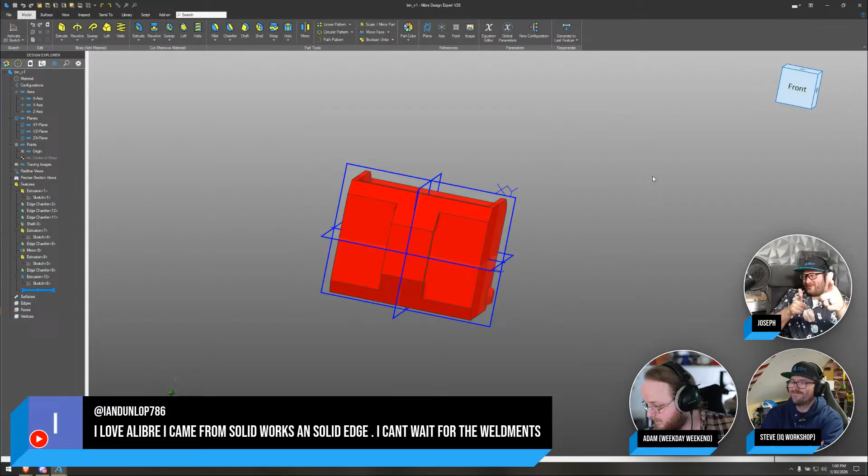Thank you guys for the positive comments. We do our best.

Want to make you re-up for maintenance? I mean, yeah, no one likes spending money, but not to toot Alibre's horn too much, at least you don't have to pay for all the years in between like some other options. And when V29 comes out, I can't think of a better reason to re-up, because of the features that are coming out.

I like this one, let's call that a torus. Torus is less distracting. I think I'm getting hungry like me. It is lunchtime. Yeah, it is. Now, do we have any... Oh, why can the dog swim? Because he's a good boy. Oh, I love that one. I love that one.

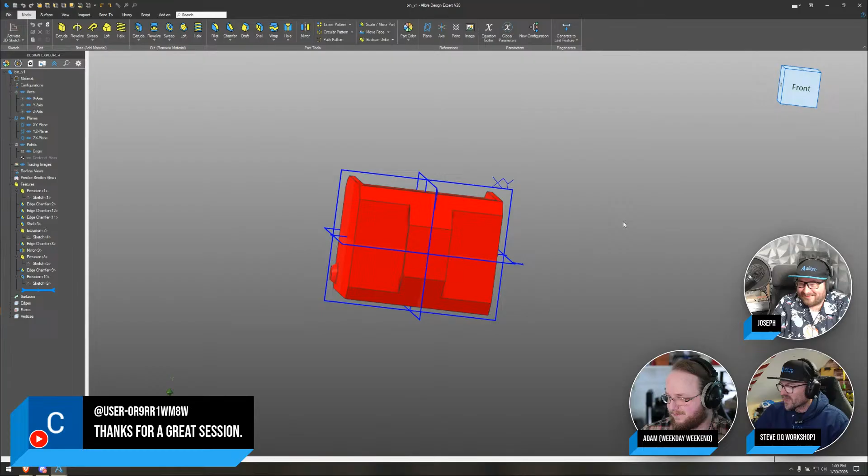That is a good one. Thanks for a great session. You bet. Hey, I was here when Geomagic came and went. Wow, yep, that was definitely prior to my time.

So if anyone doesn't know, the story goes that Alibre started as the very first web browser CAD, back in 1999, prior to Onshape. So Onshape can say a lot of things, but they can't say they were the first. Alibre then became a desktop install because that was just way too ahead of its time for the internet speeds back then. Alibre was bought up by a company, 3D Systems, and a lot of the former Alibre employees were not happy with how it was being developed, so they actually bought back the rights. I believe it was in 2017, Alibre became independent again, as you know and see it today. So it was a really cool story.

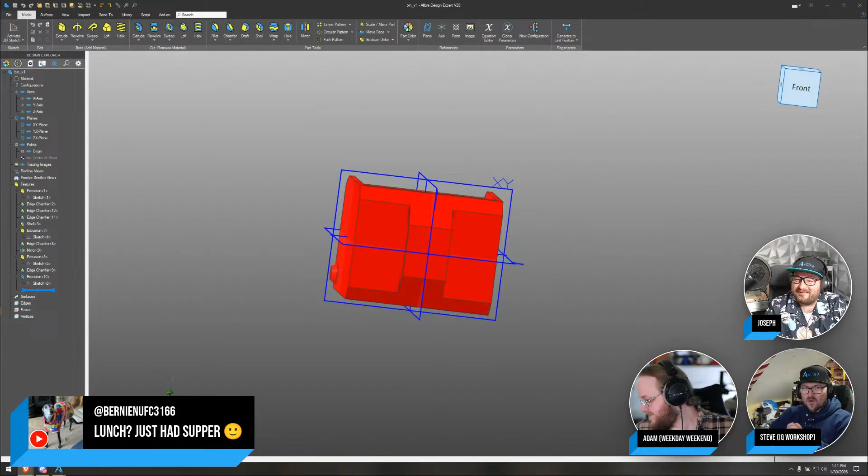I'm just doing mental gymnastics because making a browser-based CAD application in 1999, what technology was being used to make that work? Because you don't have the advent of all the tools we have today to help you do stuff in the latest version of HTML and all that sort of good stuff. Dreamweaver and all of those sort of things back in those days was kind of like cutting edge, right?

Actually, that was kind of my answer. The technology they were using was probably pretty close to Dreams, that was probably what they were on. Yes, it was powered by Dreams mostly, and some of our new features we try to continue to dream. Big Design Energy, I don't know what you're looking for specifically.

Again, Ex Machina Engineering has a really good video on a whole bunch of pieces of software he uses for those kinds of things. Some of them are free, some are paid, but he does his best to cover it. What's the objective here? When we talk about sim, what are we talking about? Sort of physics simulation? Are we talking about something else?

Great question. I'm thinking finite element analysis. Being from an ANSYS background, ANSYS is great for being able to do stress and strength tests inside of a model. So I like Mecway. If you're an Alibre user, you might like Mecway too. Mecway is a perpetual license and it's a pretty affordable one, just like Alibre is, so there's a lot of similar philosophies. We've chatted with some of the folks at Mecway, great people. I think it's based in New Zealand, and they've actually incorporated interoperability with Alibre, so you can use your native Alibre files straight into Mecway, and there's a lot of simulation capabilities. They do not only just straight finite element analysis with stresses and all that, it's got a great, easy to use mesher, and we have some videos on how to do it on our channel as well.

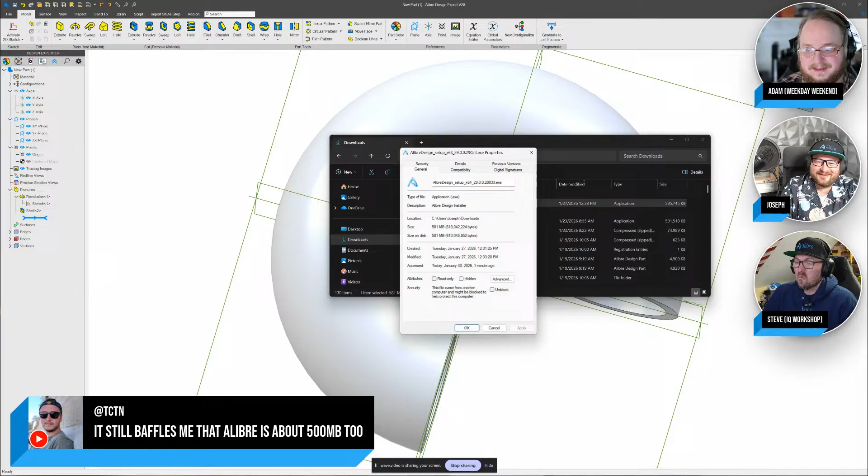A little preview here - it looks like the V29 install file is currently 591 megabytes. Nice, really nice. That's pretty slick.

I think that's something that, Steve, I don't know what your relationship with Linux is, but Joseph, it's always nice doing a sudo apt upgrade and seeing 14 megabytes of data freed up. All right, upgrades people, upgrades.

Well, hopefully 29 opens the door to other OSs, right? There is a chance - we're all sitting here crossing our fingers. As soon as that releases, I'm going to be trying to run that through Wine and Proton just to see what I can do. Yeah, I'm rooting for you. I want that, I'm going to be doing my best here. You guys will be the first to know if anything good happens.

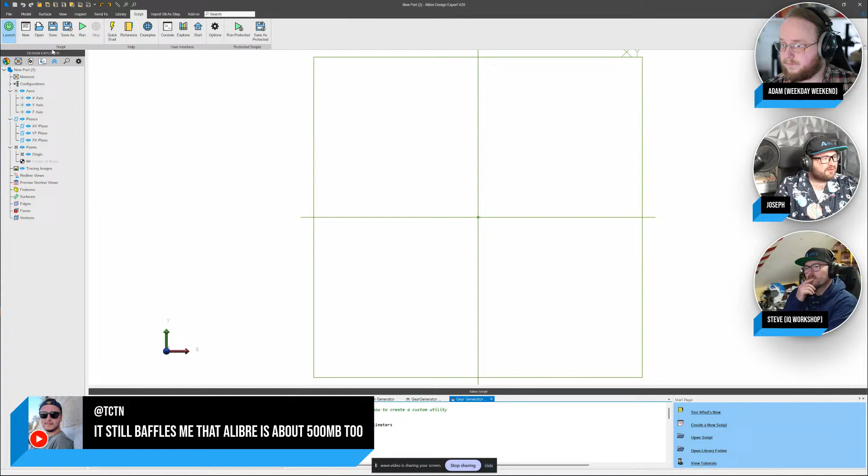When I run this script, it lets me type in the number of teeth, and I'm going to do a really strange number, 21 teeth. Diametral pitch, let's go with 15 point some random decimal. Pressure angle, let's do a custom pressure angle too, why not, so I can give this the ugliest gear ever. And when I click OK, it just generates that gear for me.

So that's one example, right? There are other scripts that can update information on drawings in a very custom way. So the workflow kind of depends on what script you're using. I think you have to approach it with the same mentality as making a model itself, thinking about what's dependent on what and the best way to future proof it. But I don't know if I can give a super specific answer just because of how general scripting is. You can make a script for almost anything. Wish I had a better answer for that.

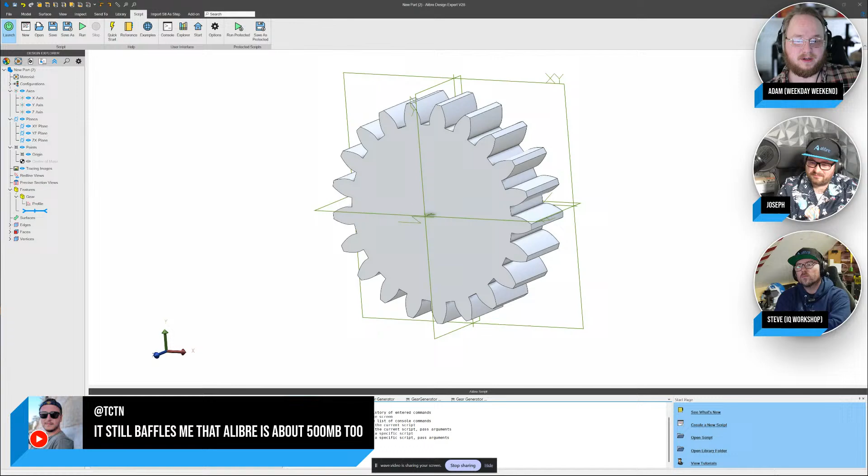But Adam, I don't know if you have anything. No, I was just going to say a lot of them are probably on the forum. If you wanted to find something, I'd also say I'm definitely not anywhere near good enough to start writing Alibre plugins, but I'm looking to start learning Python. From what I've been told, it's actually a pretty good language to learn. So if that's something you were wanting to do, this might be a good way to get into it, because Python's pretty approachable from everything I've done and everything I've been told.

So as a newbie, looking at the script side of things, Alibre ships with a bunch of scripts, right? Is it just the gear generator, or are there more? Yeah, so all these in the examples folder are what Alibre ships with. You have part and STL exporter, part exporter. You have an equation sketcher, so you can make an equation and it sketches out the mathematical curvature of that equation, which is pretty cool. And you have a gear generator.

So would it be fair to say then that for Big Design Energy's question, it's actually quite complicated to answer because each plugin needs to be taken on its own merits? Yeah, exactly. The gear generator, you would have one approach for this. The mathematical drawing, that's a different scenario, you'd come at it from a different perspective, right?

Right, if you can see in my browser here, we have an Alibre script section, and you can ask and answer a lot of scripting questions if you have any specific needs as well. And then under resources, I think there's a lot of scripting type things in here too, scripts that people have made and are sharing.

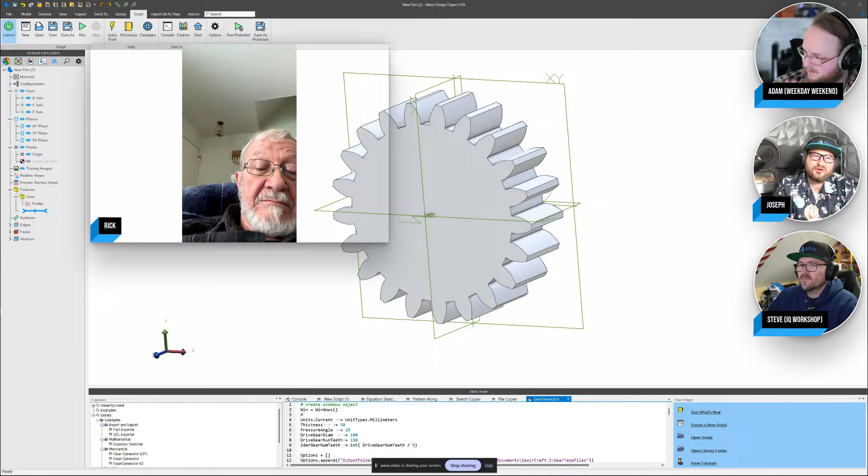Sure, we'll put you on the air, Rick. How are you? Not too bad. Just curious when V29 is going to be released. Yeah, great question. We're thinking early Q1, or I'm sorry, later Q1 or early Q2, somewhere in that range. Well, that's pretty reasonable. I've had Alibre since it started, way before GrabCAD came around. So keep up the good work, guys. Thanks, we're grateful for you, Rick. Thank you so much for joining us. Thank you so much. Bye. Bye.

That's awesome, it's great to hear from our longtime users. That's so awesome, and thank you so much, Rick, for being patient. Yeah, for sure. The fact that you've got users of Alibre that have been around that long, I think, is a testament to the software, right? If it wasn't any good, people wouldn't stick around.

Like, I mean, I am not an Alibre employee, they're not paying me to say this, but how many people are out there right now with their current CAD software literally searching in their web browser for alternative CAD options? Search on YouTube, Fusion alternatives, and you're gonna find tons. So I don't see a whole lot about Alibre saying that, but I'm a little biased.

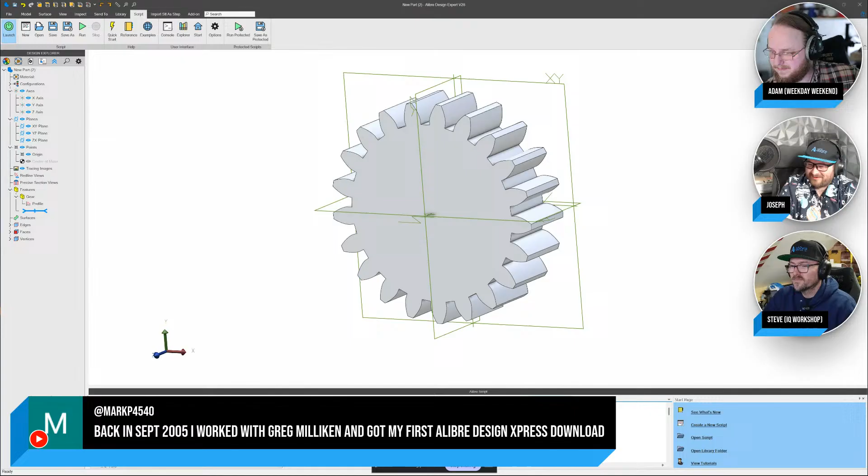Gotcha. Yeah, we have some longtime users back since September 2005. Wow, nice, still on V22. V22, and you know what, it still does what you need it to, doesn't it? It works great, lifetime license. Exactly, and Alibre is not sending you like, hey, pay up or we're going to cancel your V22.

And that's- your files are not in the cloud, being looked at by who knows who. The biggest thing too. Yeah, I'm with you, Big Design Theory.

I'm totally visual. I think do you know what? I think the vast majority of creatives are like that. So visual, kinesthetic learners learn by doing. I definitely am one of those people. I don't typically read for pleasure. I only like reading manuals and tech documentation if I absolutely have to. I much prefer to jump in and plug things together and see if I release the magic smoke, and learn that way.

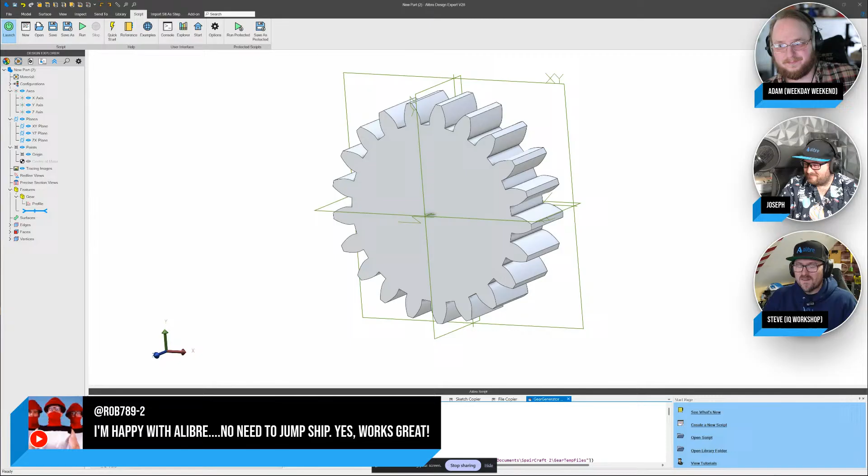We all love the magic smoke, right? You learn how stuff fails that way. Nothing like remembering the thing you're working on came out during the capacitor plague, after you plug it in. There's nothing like the smell of burnt electronics in the morning. Oh, yeah. Yeah.

Yeah, that's an interesting one. It's amazed me that people don't think about the fact that the cloud is merely someone else's computer. I'm wearing my Alibre hat, sometimes I have my tinfoil hat on, and think about that stuff too. So regardless of that, you've got to think that, as well-intentioned an organization is, there is no such thing as 100% data security.

There's no such thing even on your own machine. Correct. I mean, the best way to not have a device hacked on the internet is not to connect it to the internet. And to be fair, with Alibre, you can install the software, you can disconnect it from the network, and be completely siloed and continue to work. Yeah, not every CAD application can say the same. Yeah, I think it's like once a month or once every two months, it wants to verify your license, but that's a heck of a lot better than phone home immediately as soon as you open the software.

And am I right in thinking there's an offline verification for that as well? I believe there is a specific license you can get that is offline, if I remember right. I would have to have Joseph keep us honest here. We don't want AI hallucination here. Yeah.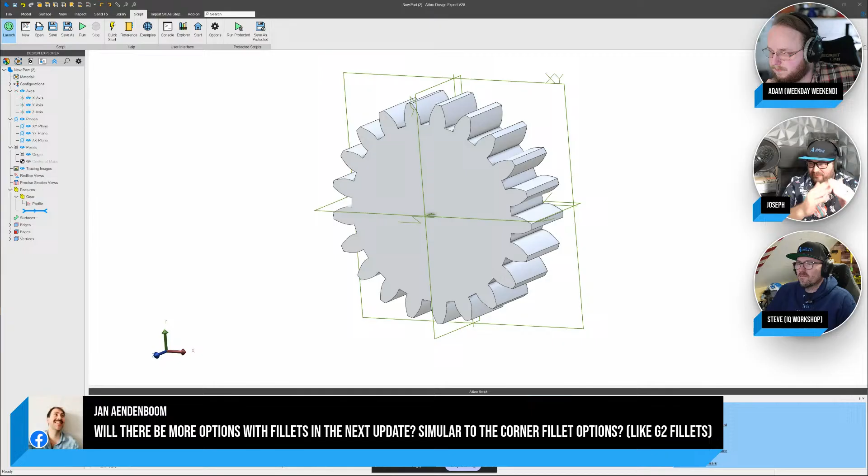This is a good question here: will there be more fillet options in the next update, similar to the corner fillet options, like G2 fillets? If anyone doesn't know, you have G0—this is how things flow. G0 is like that edge where you just have two things forming an edge, with no smooth continuity between them. G1 is like a fillet—if I put a fillet on this model, here you have a constant radius, then we go into a straight line, and G1 is where they're tangent, but it's a very abrupt change. If you're a math person, go into the next derivative and you'll see a sharp corner as far as curvature goes, because we're going at constant curvature into straight. G2 is where you have a transition from one constant curvature into straight or another constant curvature, and if you go a derivative down you get a smoother transition. So that's what's being asked—are we going to have G2 fillets?

I'm going to say with V29, the fillets are not going to change, but I am hearing G2 being thrown around a lot more. So if there's any indication, I think G2 could be looming in the future at some point.

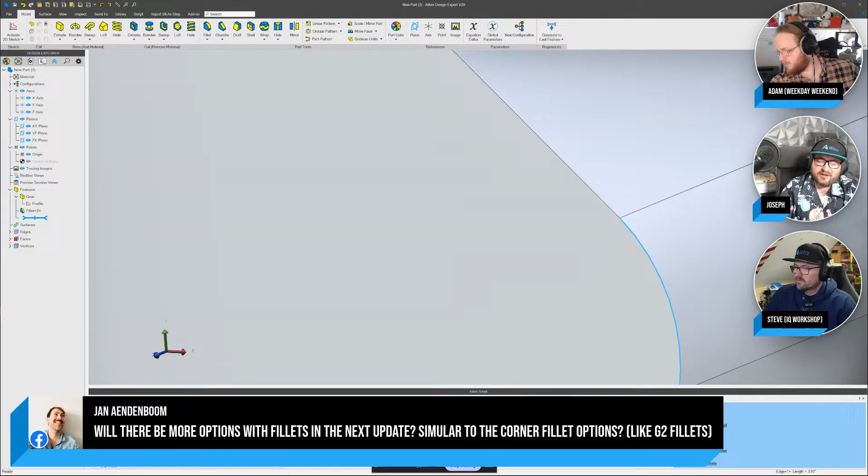Is that a feature request already on the books, or a feature request in waiting? Good question. I would say if you're interested in G2, let us know from your home screen on the suggested feature—I'd love to hear from you.

Smoke is just the fragrance of every engineer. I'm going to say yes—inspiration requires perspiration, that's sometimes why engineers smell funny. You know the other name for sawdust, right? Tell me about that. It's man glitter. I've never heard that one. I like that—hey, if you touch it, it's hard to get off, so that checks out.

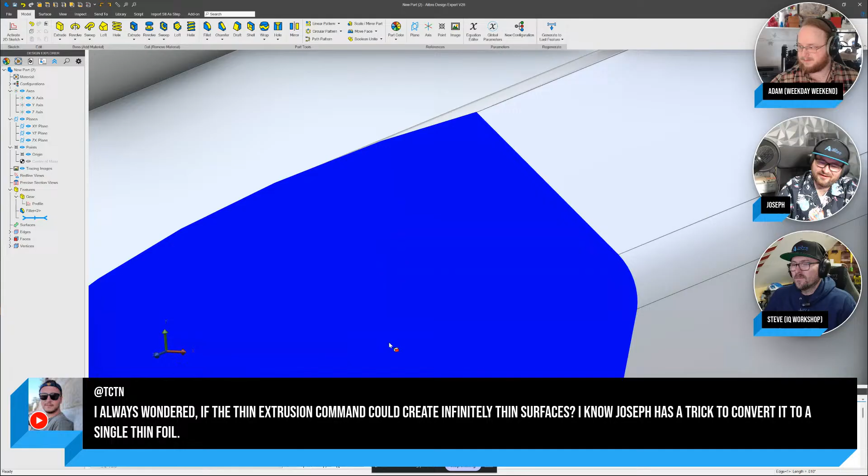I have seen some people do some pretty interesting things with thin extrudes, but as of right now I haven't been able to reliably generate surfaces directly from sketches. But in theory, that's how you would extrude a surface, with an infinitely thin extrusion. So that's an excellent question.

And interesting—another feature request to have. Shout out to TCTN, one of our heroes in Alibre, if I'm not mistaken. TCTN has actually done some Too Tall Toby competitions with amazing success, so we're always grateful to hear from our favorite TCTN. Joseph, yeah.

Just jumping forward a second, looping back to a comment you just made—Jan's asking, 'What do you need from my home screen?' I think that's in terms of the feature request. Oh, yes, yes, on the Explore tab there's a Suggest a Feature button.

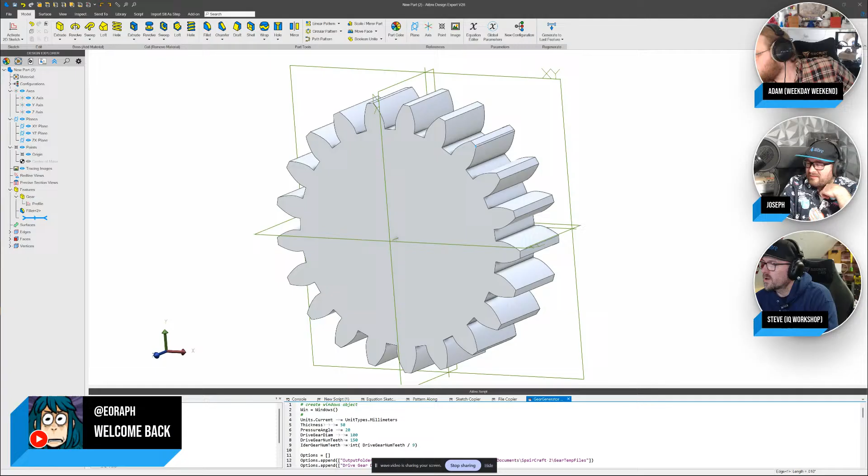So there was a surfacing question, and I should have pinned it here. Let's have a look. Let's see here. Is it this one? Yes, yeah, yes that is it. Okay, look at you, thank you. Yeah, big design energy, great question. Let's jump into it, I'll create a new part here.

So when we talk about surfacing, there are a few ways to generate surfaces in Alibre currently right now. So maybe I'll make a cylinder here, and when we go over to the surfacing workbench, we can convert our solid to a surface. And that's particularly useful if you need to work with one body and not another body, right?

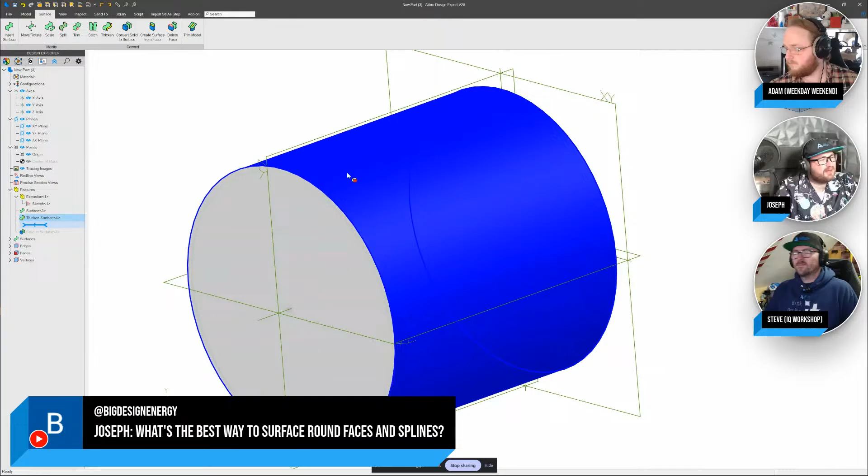Some people call that multi-piece modeling because you're kind of working with pieces instead of true bodies, which we've talked about in the Weldments. Another way that we can do it, if I roll this up, is I can generate a surface from a face. And that way I still have my solid, but I have this surface that kind of hugs my solid. And then I can run things like thickening that surface. If you can tell, we've just made our solid a little bit more thick. So there's ways that you can use surfacing to enhance your workflow. But it really comes down to using one of those methods, right?

Another thing we can do is delete face, and if I delete a certain face, the rest of my solid becomes a surface. And there you can see that surface that we created from our face earlier. But it's down to one of those methods to surface round faces and splines. We would start by making a round face and converting it to a surface in Alibre, or we would make something with a spline and convert that into a surface.

You also can import surfaces, so if you're dealing with another surfacing software, Rhino is really good for surfaces. You can make a surface in there and bring it into Alibre as well. But I'm kind of an all-native guy, I want to make my surfaces and have it all in one file. Let me know, Big Design Energy, if that answers your question.

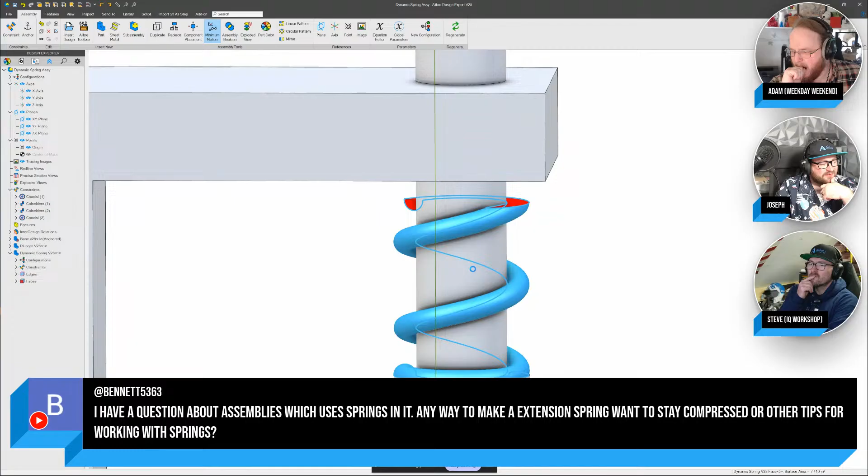So I've got the spring that currently is not dynamic, but we want it to be able to adjust to meet this face right here. So I'll go to edit here. And I think because I just opened things, it's taken a second. There we go, and I have to remember how I did this, but this is all design in context. So you have to go edit here. And now that I have the spring in my upper level assembly, I can say, if I have any favorites...

I don't. Should have named them, I should have named them. That's right.

Okay yeah, it's this sketch. I might just post a link to the video I made about this. It's one of those things where, like, he's a little out of practice, guys. Yeah, I cover so many topics all the time that sometimes I forget about what I've been doing. All right, I'm going to post a link to my YouTube video, that's going to be way easier.

Sorry about that guys, we really like trying to give up stuff live, but every once in a while it serves you better to... yeah, we could probably just... there we go, guy, but there you go.

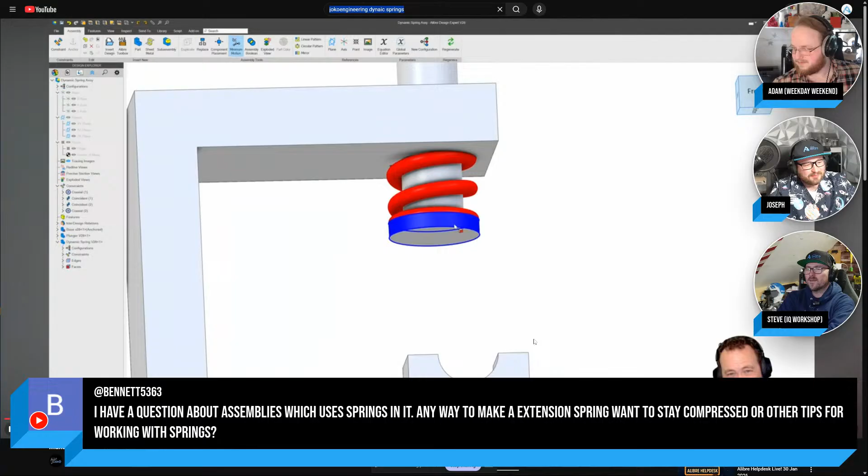So you can see how it moves and updates, and I kind of show how to get that in the assembly. But basically, you do a design in context, and then you can set a certain variable. So I make a line that goes from there to there, I can then say that spring height should match that line, so as things move up and down, you can get the spring to move up and down with it. Long explanation, but here is the dynamic spring video in the comments, which apparently I do better pre-recorded than live. Yeah, everyone does, the magic of editing. It is magical.

Any other questions, anybody?